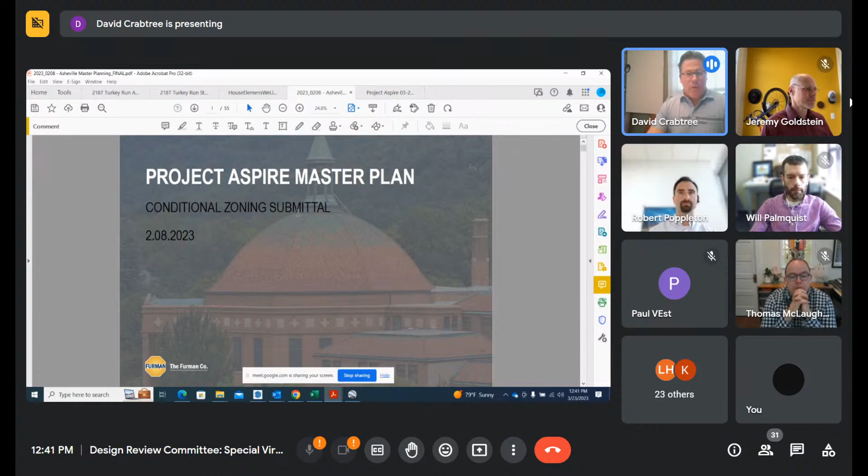With that, can y'all see my screen? Okay, cool. I'll go through this pretty quickly, going back on one of our grand vision sessions in 2021 that went through many activities. We wanted to highlight the sort of listening sessions we had, a pretty large group of folks going through that, building models, doing exercises like build your future and day in the life. That tells the story of who might come to this site from all walks of life, different backgrounds, the affluent all the way down to the unprivileged and the homeless.

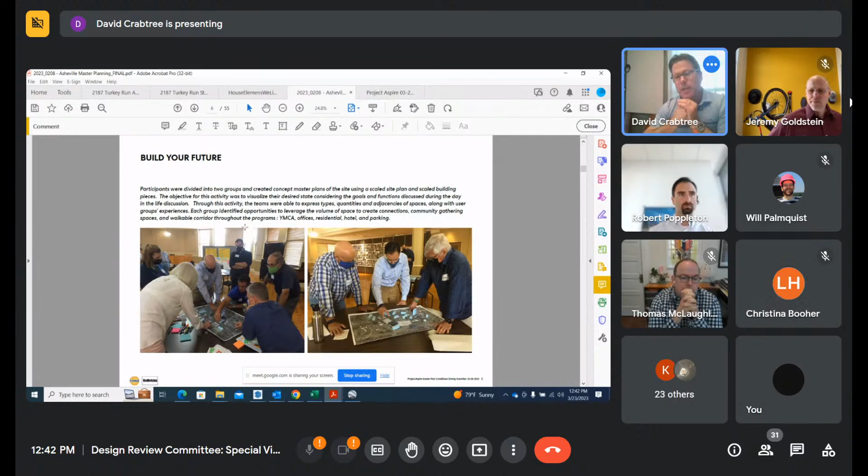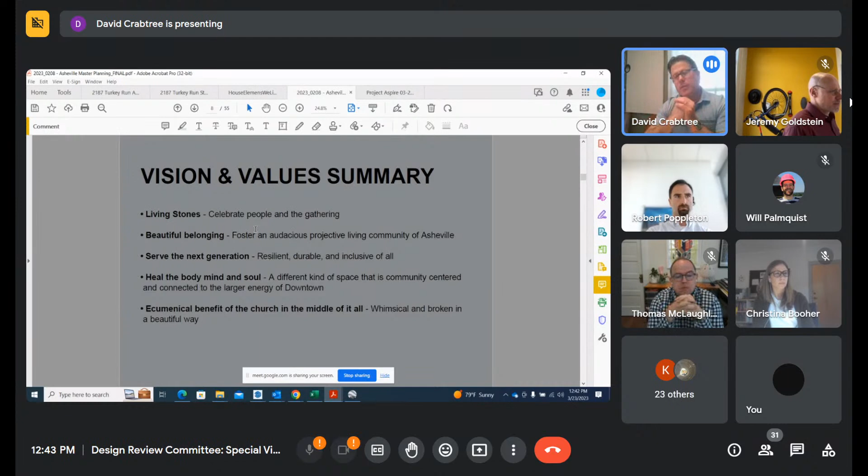And how do people encounter the site and feel welcome? Out of that came real-time modeling with workshop groups, real-time charrettes, thinking about what this project may entail. Really powerful things came out of these vision sessions: the idea of celebrating people in the gathering, what we call living stones, a sense of beautiful belonging, creating this around what is right for the community of Asheville, serving future generations and broader resiliency, creating a place of healing, thinking about sustainability, but also adding space for small startup businesses and the broader world of both the Y and the church, an ecumenical benefit.

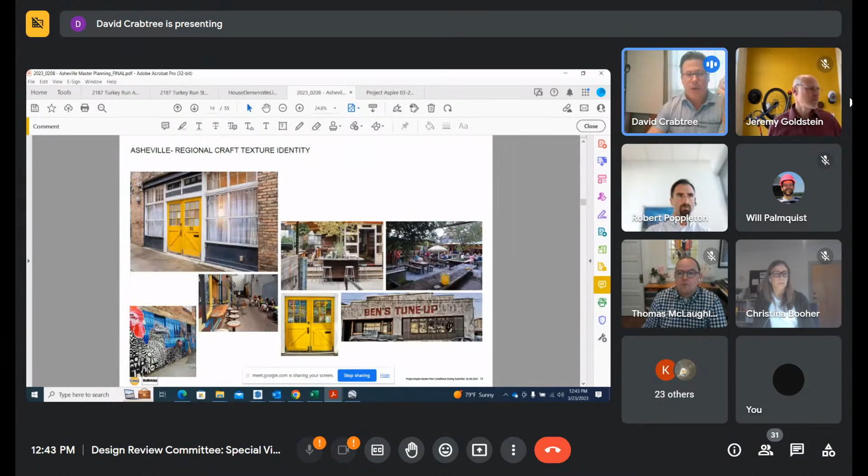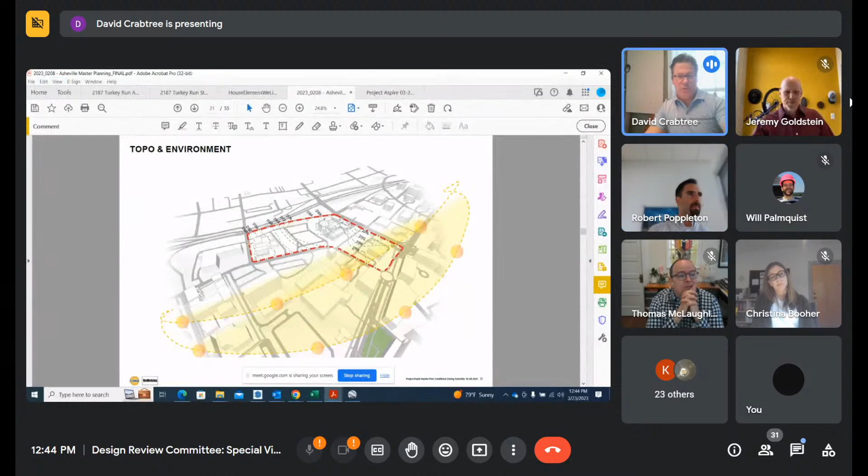Dave, can you put that on full screen? Yeah, control, just to assist. I can. Good. Two more down, full screen. There we go, there we go. For some reason it's not doing it. All right, sorry, maybe we just continue. Yeah, that's what I was doing. Control L, something is not... Yeah.

I can also zoom in where needed. Again, the site and gateways and approaches, considering a lot of view angles towards one of the defining features of the church, the dome. That was very considered throughout all ways of approach - the idea of what we call the mountain and the valley, scaling larger buildings to the perimeter outside, and then the valley, framing the church in the spiritual space in the middle.

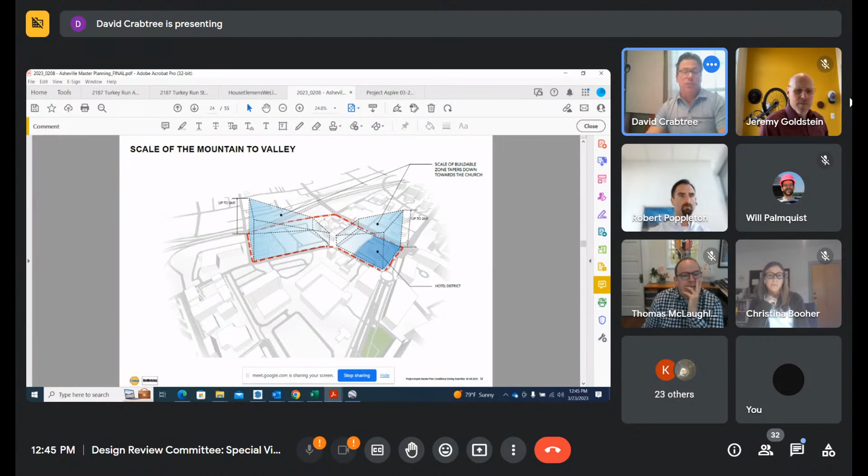The site is zoned for 265 feet for a good bit of the site. In fact, 265 feet comes all the way much further right about into here, and likewise right about into here for this portion of the site. This darker blue zone here is designated a hotel district, which we're not using that much for the hotel, but that is part of the zoning. These are the heights as currently zoned: 265 feet, 265 feet, and then you have the intermediate zone.

We're not proposing to use that, and we're really looking at the totality of the site and how we can scale down to the church. So diagrammatically, we're in our higher zones here in blue, the more intermediate zone here, and then we've created what we call the church or dome height zone here. And of course we're not building anything substantial - there's a lot of buffering around the church, as that was very important to them.

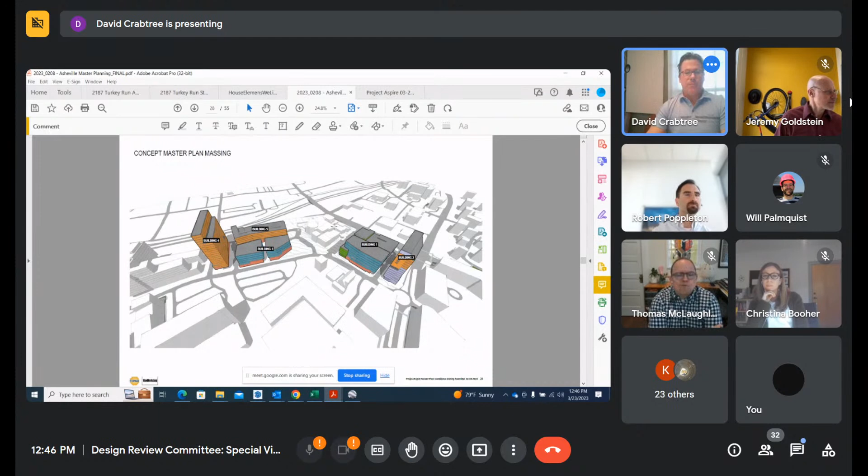Just the broader phasing: the church here, existing Y was over here, larger scale development to the perimeter, and then scaling down. Knowing the scale of modern development and the size of parking garages, a goal of granularity was very important. So bringing in vias and alleyways that would be more retail activated, pedestrian scale, is the intent of breaking down some of these blocks.

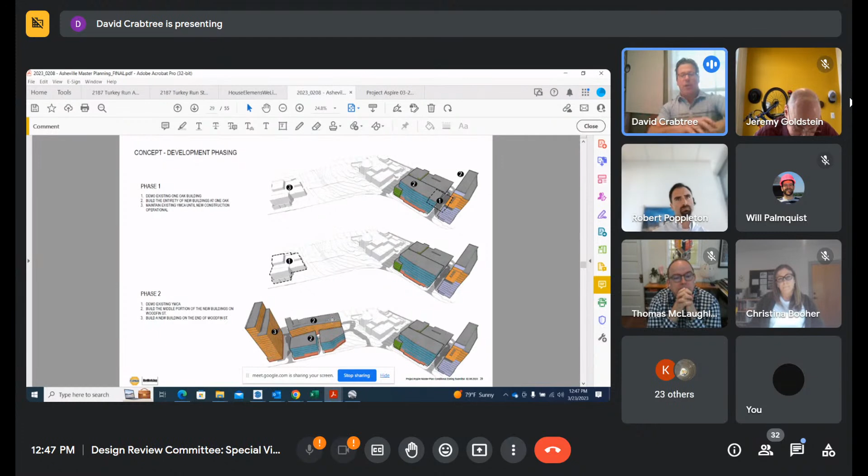The phasing, for example, would be more phase one hotel and YMCA mixed use for phase one. As phase two comes on board, whether that's taken down as one phase or still has some, I'll call it 2A, 2B, incremental through these multiple buildings. Most of our parking, or all of our parking other than street side, is identified more in structured parking that's then screened and wrapped with other program along with street side parking.

That broader master plan looks like this from the aerial view. Again, church, the phase one, phase two zone, and this may be broken down into multiple sub-phases of phase two. Where you start to see the interior vias that would be more retail focused, very intentfully framing the church dome along different areas, even making very specific urban form to frame the dome from a distance, shaping the buildings along these edges to open up that view vista back towards the dome.

In our master plan, because we're really looking for height, area, and bulk, what we've tried to do is accompany it with like kind development. So around the perimeter, the imagery is a little more generic in terms of massing, and more specific streetscape and other activation is shown along with the massing imagery.

I'll add a quick comment. As mentioned at the onset, we'll have some live models to share that reflect some changes. One of those changes is around the hotel. Currently it showed a mixed use. It's going to be reflected as a singular hotel use, and will not have what is currently shown in orange representing residential as part of that building.

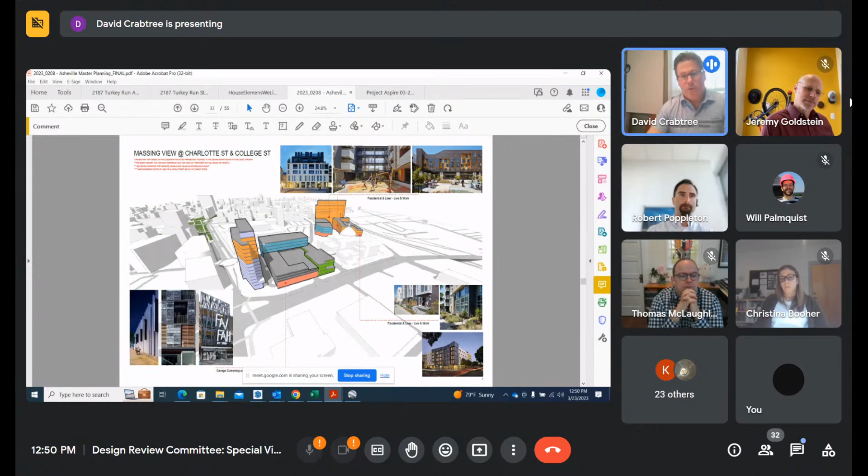Correct me if I'm wrong, Robert, we don't expect to be losing residential units overall, because it's one of the key markets making this a sustainable development. So it's not as if residential is going away versus shifting to other portions of the site. I agree—maybe even increasing. We do really recognize the affordability components as well.

Back to some of the views coming from along Oak Woodfin, seeing the dome off in the distance, seeing the buildings scaling down. The massings are intended to reflect what may be. We have been very transparent. We're meeting the pedestrian scales and breaking down of the streetscape and so on. Final design may have some variations of these, but would be around these sort of intents.

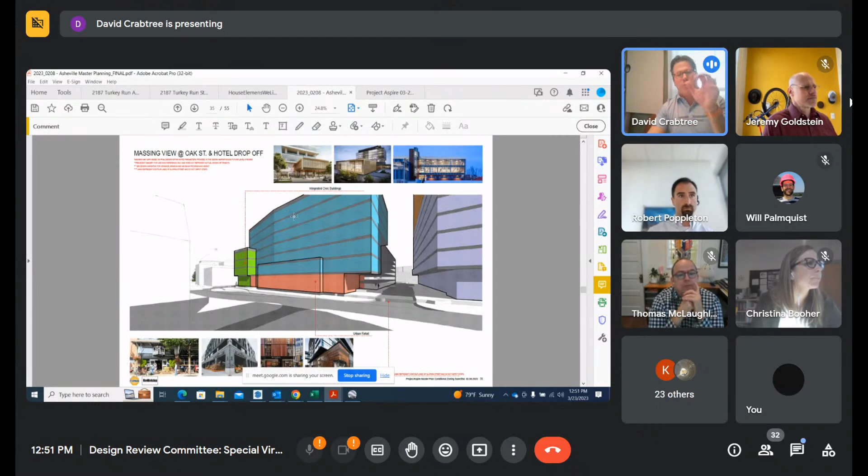Again, looking at phase one, where the hotel is to the right, church dome to the left, back away, standing at the front of one of the current church drop-off areas along Oak Woodfin, and then looking back when you start to imagine what we've called, and will rename, Fellowship Way.

That is really intended to be more of a festival street—zero curb line, streetscaping, decorative lighting, things like that. It's easy sometimes for us as a design team to imagine all the things it may be. You guys are also creative folks, and that's where some of our supplemental imagery is hoping to supplement the vision.

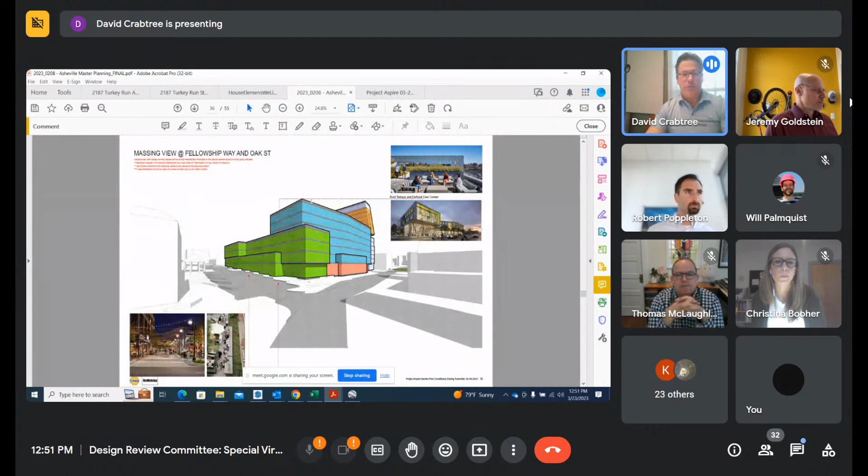Activating corners, defining how we design the corners—all of those are critical pieces that are coming to light. This is the street section that's between the church. It was very critical that we maintained about 90 to 100 feet, plus or minus, between us and the church, and that was for their comfort.

They do like the nature of being urban, but also realize they have elderly folks that need proximity of parking next door, at the drop-off zones and things like that. However, in this imagery we've stripped away a lot of the streetscape just so you could see the street section. You would imagine this—and we'll show it later in our civil plans—where you start to layer in more of the benches, street trees, street lighting, and so forth.

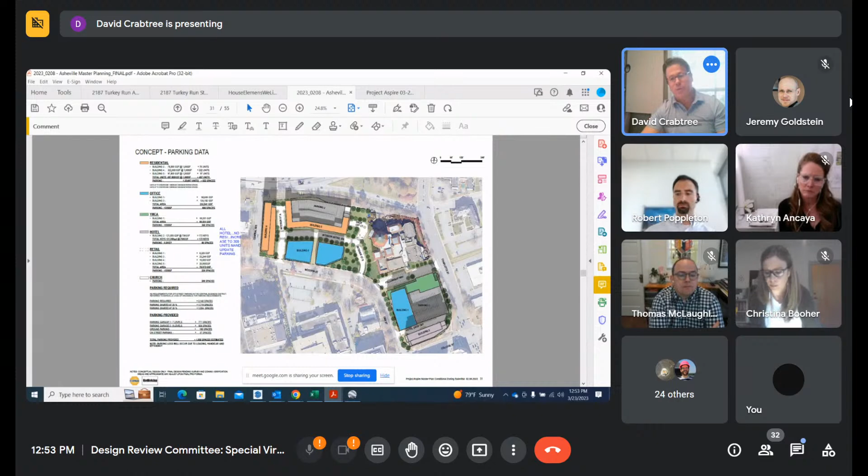This is the internal via. Master plan wise, let me relocate you just to understand. This view is sitting here, looking up this sloping street. We have about 40 feet of grade between over here to the left to over here to the right, from central up to here. So when we go back to this sloping street in context, you understand kind of where you are.

We imagine this. While it looks narrow, it's not as narrow as Wall Street. This is a 70 foot or so street section. Again, imagining retail coming in and more walkability, sidewalk dining, things like that happening, also indicative of the imagery that we're showing on the right-hand side.

I'll make some attempts to zoom in, apologies for it not being full screen, but this might be a street that's better for pavers and such. A slow street, we do imagine cars being integrated. We've discussed whether it may have an option of a non-car zone on a full-time basis, but certainly would be shut down at certain points to be only for pedestrians. At this point, it is an integrated slow street with both vehicles and people on a regular basis. We feel that could be compatible when you add in a lot of streetscaping elements, like what's seen in the imagery along the right.

You find that, again, even on Wall Street, right? It's a very slow street. Cars still happen, but people still, I would say, enjoy priority there.

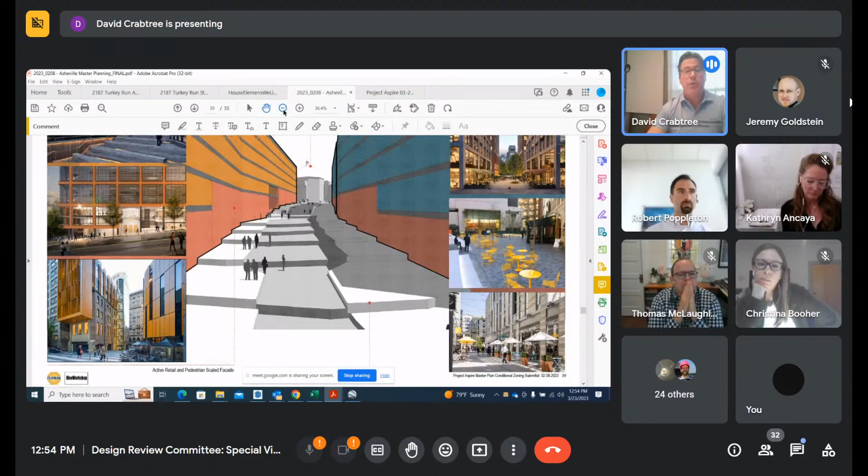At the footsteps of the church and the drop off that we would have there, residential kind of at the door, at the threshold of the church, is sort of living lifestyle. Some examples of what that may feel like.

We imagine this to be more of an open park area with public space, accessible, stepped lawns, outdoor seating, could be movies on the lawn to yoga in the park, and a wide variety of programming that could happen in some of these spaces.

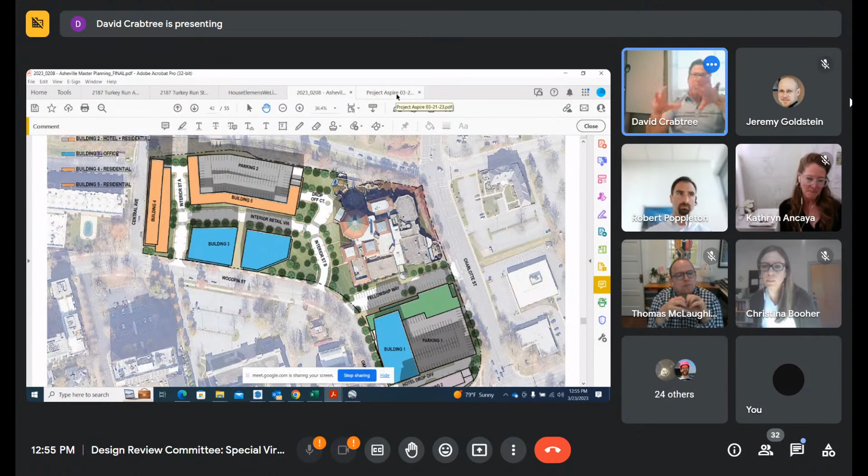So that kind of brings us really where we are today. Some of the comments we heard were about the landscaping shown in our illustrative master plan, which was very illustrative. So what we've done was take a look at pedestrian access, defining sidewalk, street sections, planting, what we would be able to keep, what might need to be replaced. Those are the things I would like to pivot to and share with you.

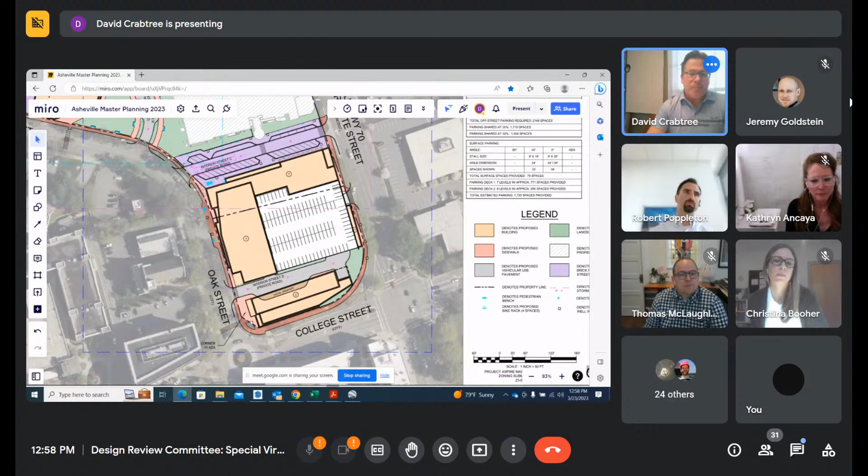As we move around, again, defining the sidewalks. Blue is where we'd also have more public benches, flexible lawn space, sidewalk connections coming up along the mixed use office buildings that are anticipated for retail, indoor and outdoor retail. The church drop off and roundabout, ingress egress to the parking deck, and also ingress egress to the parking deck.

And also recall there's that 30 to 40 feet, depending on where we take it, there's internal ramping that if you came in here, you're able to ramp down and come out here, and likewise ramp up.

We don't have and do not want any ingress or egress to the parking deck here, one because of the complexity, and two, to maintain the pedestrian feel. As I noted before, we are very intensely trying to isolate bulk parking to these two zones, to really make the streets more of an urban feel.

Again, starting to note tree wells, blue light bollards, benches and so forth along these internal vias. Similar along in here, we imagine this to be much more of a textured paving sort of, I don't want to use cobblestone, may not be what we find there, but a festival street section would also be anticipated in here.

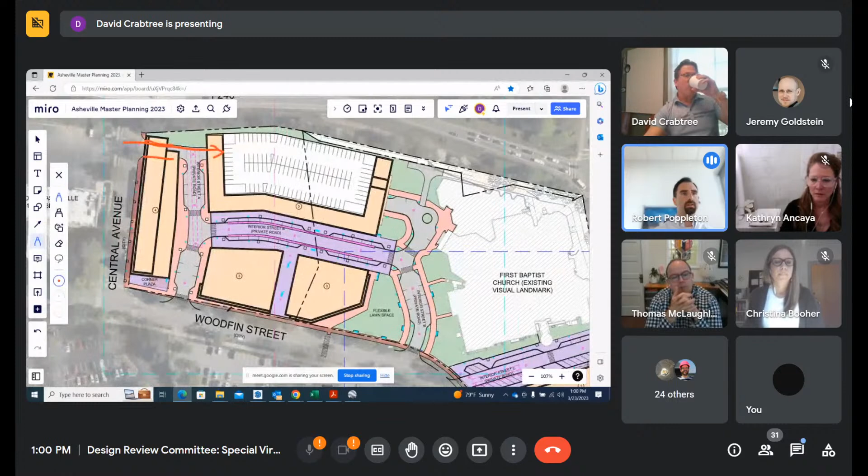These are all beyond 10 feet, and in most cases more than that. I don't have the CAD model up, and our civil team could give better feedback. They're also on the line. Am I correct that we're closer to 12 to 14 feet on some of those, or am I?

Yeah, Dave, Mathieu Maggio here, Britt Peters. Those sidewalks are all 10 feet with tree wells placed alongside as necessary. We have the existing trees here. Yes, I was talking about Central. So we have that guy here.

What are these sides? Just for proximity, what's our dimension there? Those are 10-foot sidewalks. And then these here are also 10 foot, but those have tree wells placed since we don't have room for landscaping up to the existing curb. So these are your tree wells, the squares? That's correct.

And just to re-emphasize, I think Christina, that was your question about access from Plan North on Central. We don't show those sidewalks currently, but we absolutely intend to provide them. So that may be a refinement we'll make between now and our resubmission.

And is the retail on that building floor facing the interior, or facing Central Avenue? Both. The anticipation would be both. Again, we don't have final designs for the building, so we could have anywhere there would be some loading and service needs for the residential building there.

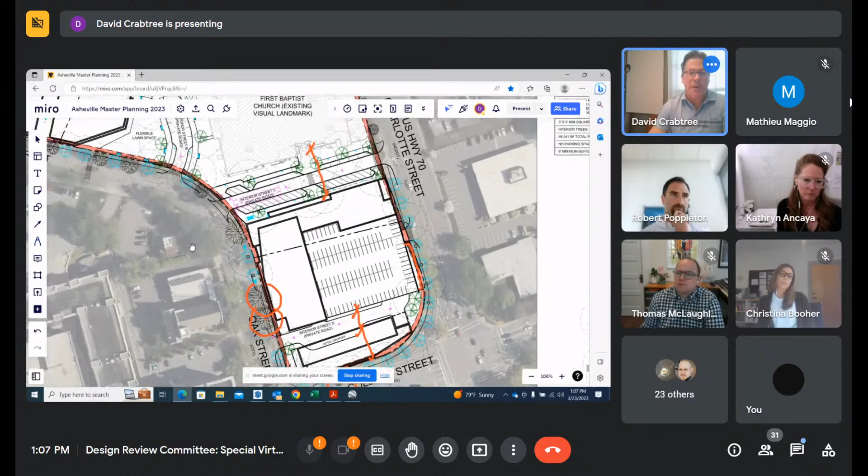But we have identified in the latest exhibit where new street trees would be coming in like these to define the fellowship way there, to existing ones that are being maintained, to then the cyan ones that are also being shown as new. Cyan being new, meeting your street standards, and then the green being more on our site and for internal drives.

But with that, I do want to turn this over to civil, and did I miss anything? You can reshare screen or share anything you wanted to highlight. I was just trying to get us through all of it. I think we've got through all of our material, and we're a half hour in or a little more, so we could have time for more discussion.

And civil, do you have anything? Yeah, no, Dave, I think you did a great job of explaining our plans. The only thing is I don't know if you want to spend a little more time on sheets 2 through 4, they're a little bit more blown up, have a little more detail about the area, some dimensions, the driveway spacing.

Things like that. Let me go back, and again, I can try to share and then you narrate and direct me where you'd like to go, or if you would like to share, that's also fine. What I'm doing, this is the second sheet, right? Yeah. So you go for it. You tell me where you'd like.

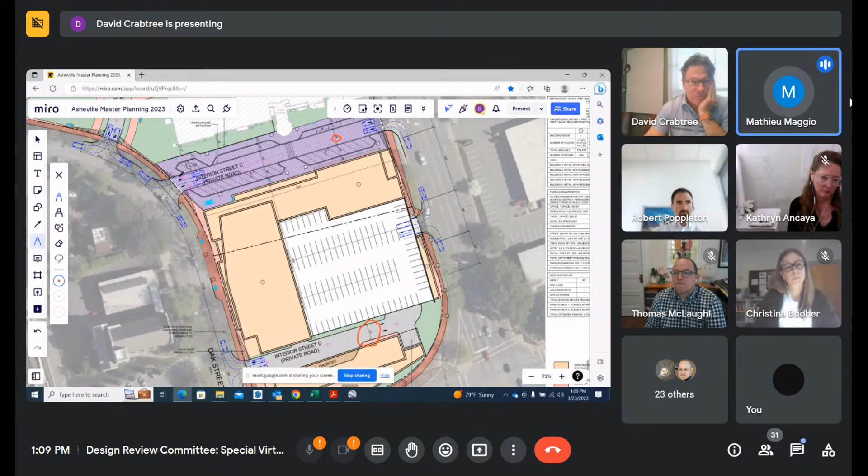The proposed sidewalk along that area is intended to basically be set back from the existing sidewalk. So that's how we're going to go ahead and maintain those trees. Yeah, so what he's describing is we're kind of holding that planting zone that you previously had.

Yeah, and then you can see we've done a little artistic feel there with a paver area to the north, just to give a general idea of what this area might look like. And then there's some better dimensions to help define the site a little bit better in space. You can go on to the next page probably.

One of the other drivers around this festival street is the ongoing safety and consideration for the childcare traffic that occurs there daily, in addition to the needs of church circulation. So that's why you're seeing some of these drop-off zones, as well as smarter designs to be traffic calming throughout that space. And keeping that drop-off area more to the left, away from your drive there on Charlotte, to maintain better stacking space and help out as much as possible at that driveway.

Probably go on to the next one. The other comment was pull-in parking as well. We did do angled parking, adjusted the plan from 90-degree to angled parking in this direction. All in an effort to make this feel like less of a through street and more like a pedestrian friendly,

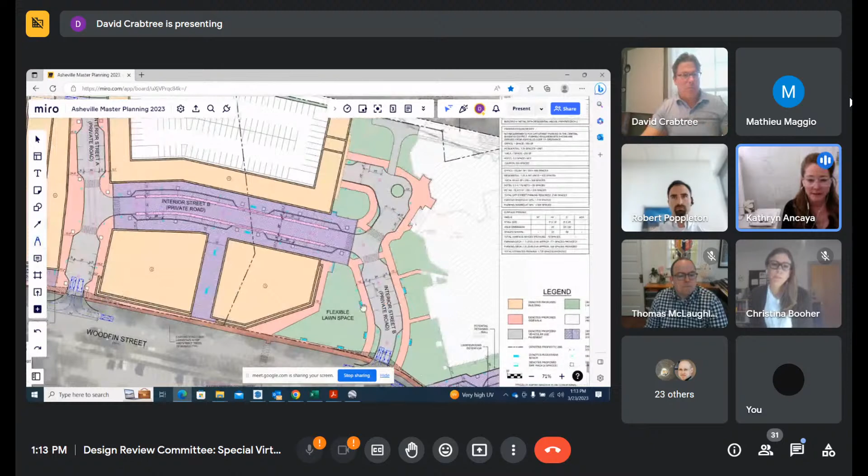I got it. I just wanted to say something about that, because I think there's a real opportunity here to think about these green areas, and even the way we're proposing the street trees, is how can the green areas or landscaping be more than just the icing on the cake, but actually be used as infrastructure. Could we be treating some of the stormwater before we take it underground? There's a lot of great opportunities and examples in other cities where they've incorporated green stormwater infrastructure into pedestrian areas, that it actually becomes a beautiful amenity.

Thinking about that at grade, and then also green roofs, managing a lot of that stormwater before it even hits your stormwater system. So I think that a project at this scale has a chance to really change the way that we think about urban design and infill development.

Also just want to point out that this area is located in part of the city that has a really high heat vulnerability. So thinking about urban heat island and how we can be using green infrastructure, green stormwater infrastructure, as a way to not only improve stormwater management, but the larger community benefit.

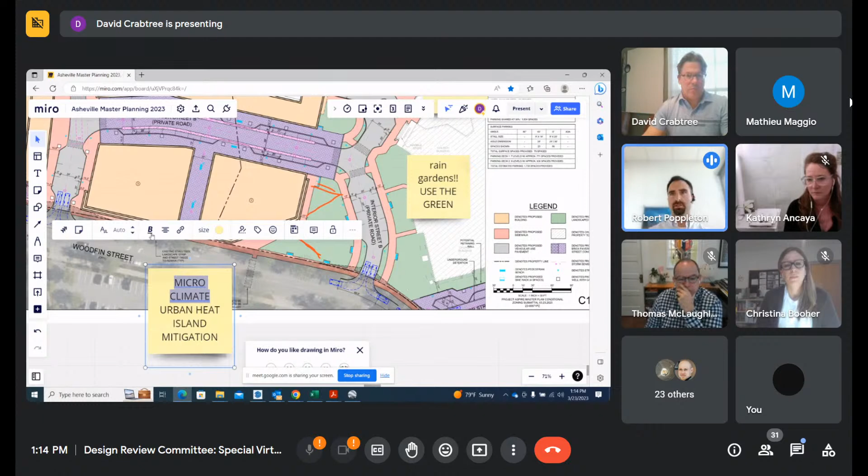I will say, on the development side, not as familiar with the last comment, but we'll be exploring that with our team. We are familiar with a lot of the practices in stormwater management through green areas and applying them in other projects. So it's certainly something we'll emphasize as this design matures. You can be looking for that in future iterations.

I just wanted to add one more thing, is that at grade, that doesn't have to look like a detention pond or more suburban type treatment. You won't even notice that it's managing stormwater, and you can use really amazing and beautiful materials. So just thinking about the way that you're thinking through the design of these other spaces, your buildings, and the pedestrian environment, to take that same level of design thinking to these green areas.

Yeah, I love that idea. We're doing that on a handful of projects right now, so I'm with you 100%. You want to join the design team?

Yeah, but like gabion walls and things like that you could start to create transition zones and cool walks that cross over different plant typologies to help filter. I was taking some notes along the way. So yeah.

Since you're excited about that, I'm going to add one more thing. Asheville has a real problem with stormwater. We have a lot of challenges. Anything we can do to reduce the amount of water hitting our existing system, which is deteriorating over time and needs to be maintained, just alleviating that pressure is something our community will benefit from in terms of money and investment. Because it's new construction, there's a lot you can do up front to save money down the road.

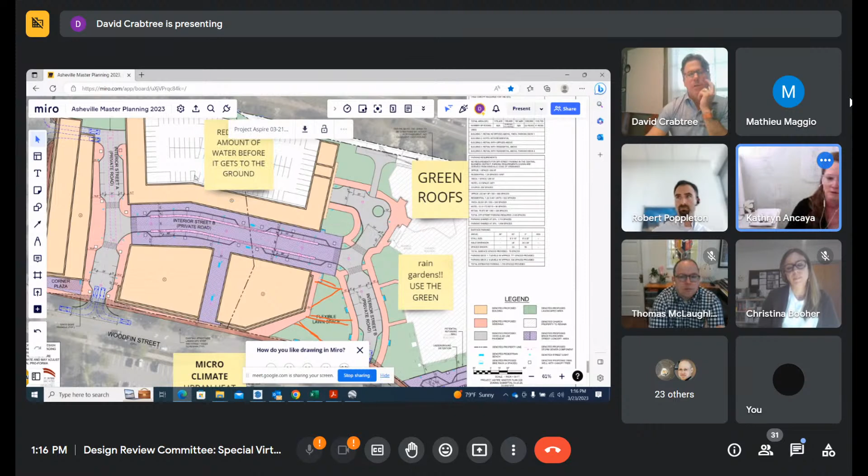Yeah, that's a good point. And then also slowing it down — more pervious surfaces, or when you were thinking about pavers, or like you mentioned, green roofs help in that way too. They do some absorption, so it's not all just collecting on a roof and immediately hitting the storm system. It slows the volume down. So I think all of that is kind of in line with where you're talking about.

Actually, going back to the question earlier, we are showing where these drives come through in some of these exhibits.

Dave, it looks like we got one question. Michael, did you want to?

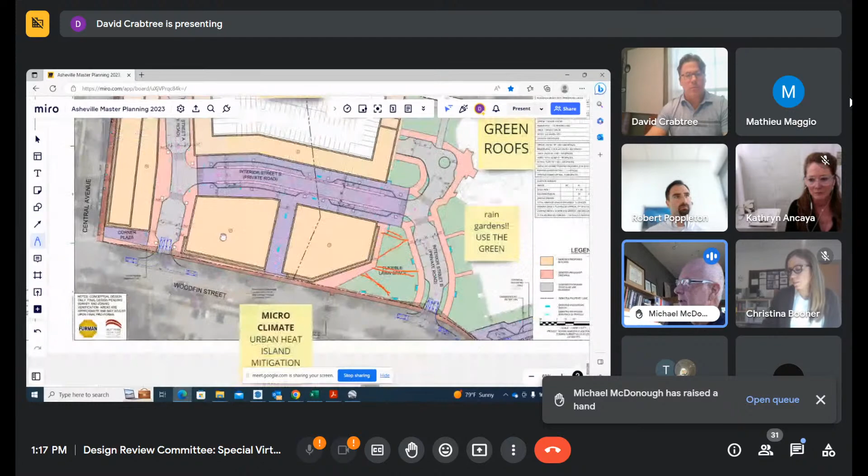Hey, yeah, thanks. I'm really impressed with the project. I think possibly the weakest corner is the corner of Charlotte and College Street. Robert mentioned there were some evolutions there in wrapping some street pedestrian elements in front of the structured parking. Do you have any images other than the 3D masses of what that is evolving towards?

Yeah, that's a good point. So let me give you — this is the broader model, if you will. And let me, at the risk of just — I did a kind of basic height exhibit so you can get a sense of where we're at. Let's see here, conceptual massing view.

Again, hopefully we don't break the internet here. I'll click on a view and everything crashes, or maybe we'll stay functional here. I'm not going to move for a second — okay, cool. I'm going to let the computer do what it needs to do here.

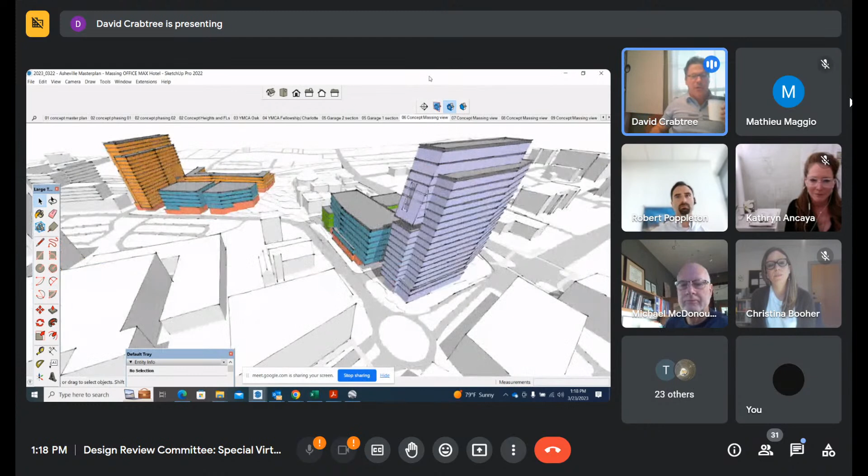Well, and maybe while you're looking for that, I'll add another comment. I think, and this is maybe for staff, the intersection of College and Charlotte Street is horrible. It's a suburban intersection, and our wonderful downtown fabric disintegrates quickly when you get close to that intersection. It's too wide, too broad, too many lanes, and that southbound turn lane that bites into your site there is kind of a suburban gesture.

Is there an opportunity for the city to explore tightening up that intersection? I was involved in the review of the hotel across the street to the south, and I thought they did a pretty good job of pushing up to the corner there, the opposite corner of Charlotte and College. Right here — yeah, they did a pretty good job of pinching that intersection as well as they could. And I think you're stuck reacting with an urban form to a suburban intersection. So I would encourage staff, if you're involved, to see what we can do about remaking that intersection.

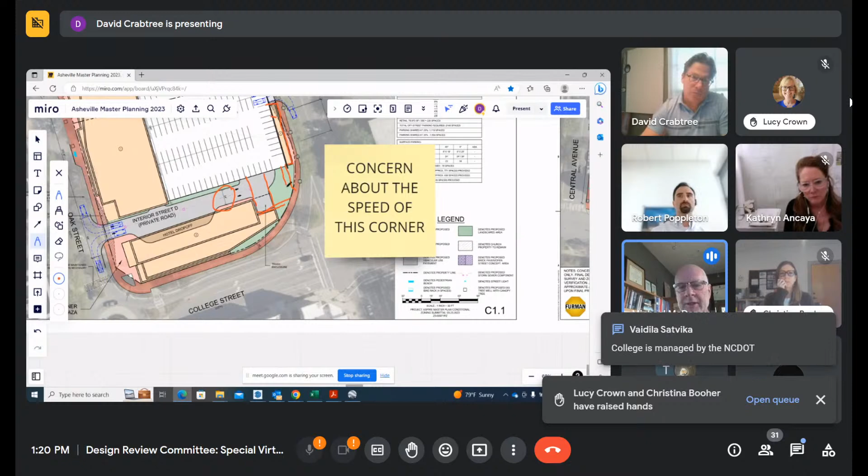I'm counting 6 lanes coming south from the interstate, becoming 7 lanes with that right turn, which I guess if we can urbanize that right travel lane — I don't know. It seems like there's a missed opportunity to reconfigure that street while we're at it.

Yeah, you're bringing up a concern of ours, because look, we're urbanists and we believe in the human experience. We're all in on adding the liner space and all that, but our overall concern is the speed of the traffic there. Whatever we build, we'll do everything we can, but without some other traffic calming and things beyond our control, it remains a challenge.

And I know this is multiple layers of government agencies on this, particularly here. Your point is well noted. We've had a lot of those conversations on this street section. I see a comment from Vaidila.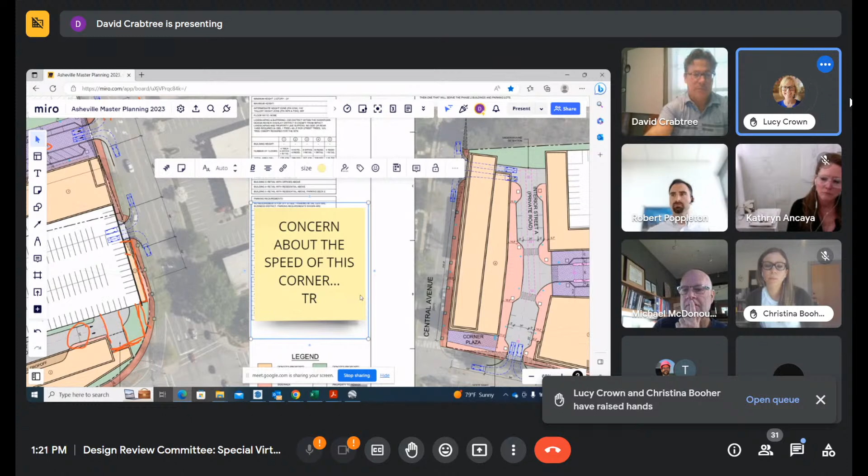I just wanted to highlight, I'm Lucy Crown, the transportation planning manager, and we're also very concerned about that corner. It is a state owned road, which is the problem, but we just heard about this project last week and would like the opportunity to take a look at this. We're very concerned about bike facilities, which are not existent in this area right now, and the amount of cars heading from Charlotte Street.

Down College and onto Oak Street and Woodfin are all areas that we need to fortify our bike infrastructure. I don't certainly know what the answer is because we're feeling very rushed trying to catch up at this point, but would really like to sit down and talk about that.

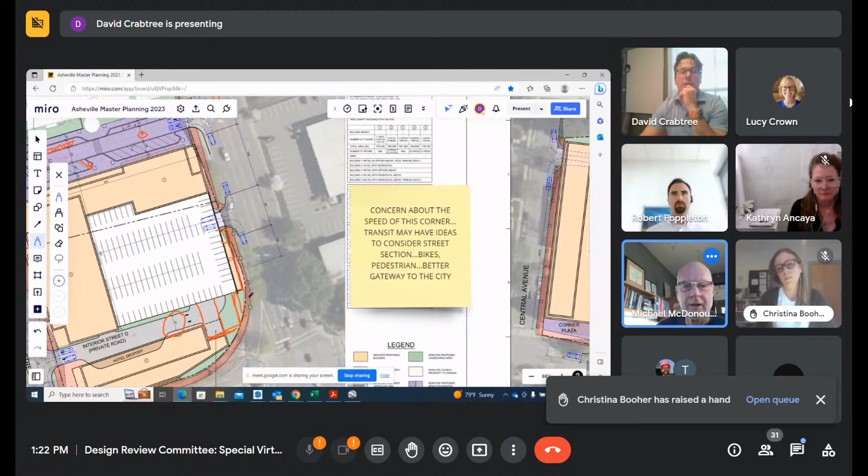Gosh, you would think there's plenty of paving there to add bike lanes. Have y'all considered a right-hand turn in only into the gap between the hotel and the structured parking there, on that right-hand turn in there from Charlotte Street? Yeah, it's not allowed based on state standards. So things we are looking at right in here and right out only. But this portion here, because of the proximity and the curve, it was not allowed.

We've had some interface already today with NCDOT where we explored some of those conversations, Mike, and we're very much in favor of improving safety along this area, and if we can support improved bike infrastructure, cycling infrastructure, that would be a big win for the community, and also for the project. Regarding connectivity, I will mention something that's not part of our master plan area, but that will be part of

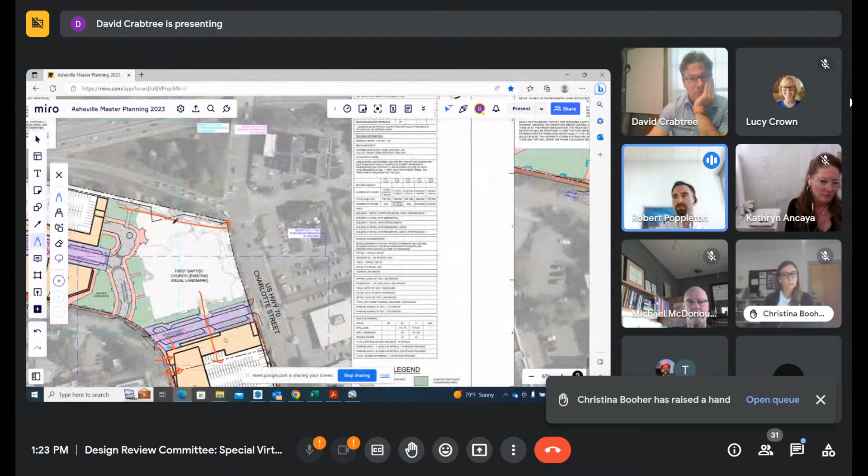our exploration with the church as partner in this project. On Plan North, establishing just on the north side of the church, there's some existing throughway we think that could be activated for pedestrian traffic at the very least. This doesn't show up in this map or in this site plan, but there are some opportunities that at least in the interim we can improve connectivity for pedestrian traffic into downtown through the project. So those things aren't given yet in this project, but certainly, we're all for improving infrastructure throughout the area, especially along Charlotte Street.

And we do imagine, for example, while we haven't shown a building being here, that, depending on the hotel flag and connectivity to the garage, there would be some level of design that would happen here, whether it's a building or whether it's sort of relief, sort of public plaza, parkish kind of vibe. But it would still be a critical design element here.

There is a pretty good grade change here. So just FYI, if my memory's right, we'll call this 14 foot, we'll call this 0 foot, we'll call this 8 foot, somewhere thereabouts, right? This here is about, I think, I'll call it 3. So just to get you a sense of the broader kind of slopes doing this. When we're coming in here, any of this loading is actually happening subgrade because we're holding the grade down. So if you're on the sidewalk here, you would be at an upper zone, if you will, just to create some context.

We have a couple questions. Christina, I think yours might have come in first. Yeah, I'm really excited about this project, and thank you for the presentation.

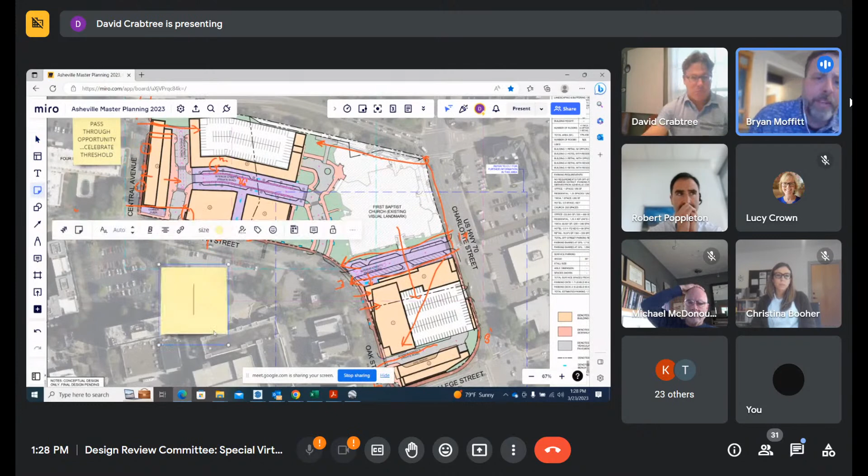Activating that pedestrian area. I know you've got to put the parking somewhere, but right now with that parking for the Y building and up for the hotel, that's kind of turning that corner. We've already talked about that corner. I feel like you're going to need something on that corner of College and Charlotte, maybe not a building, but it needs to be a designed element.

This is a gateway to the city for a lot of people. You come through the tunnel and down to this intersection, and this is always where I feel like I'm really entering downtown. I know I've seen some of the massing studies, and you're doing some neat stuff pulling that building and bringing it to a point. But at the pedestrian level, I really want to feel that entrance, not just look at the corner of a parking deck. I want it to pop a little bit more than that.

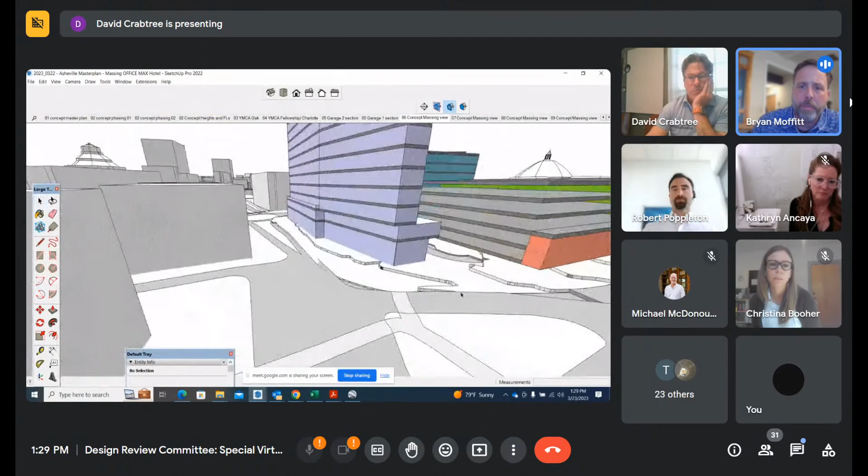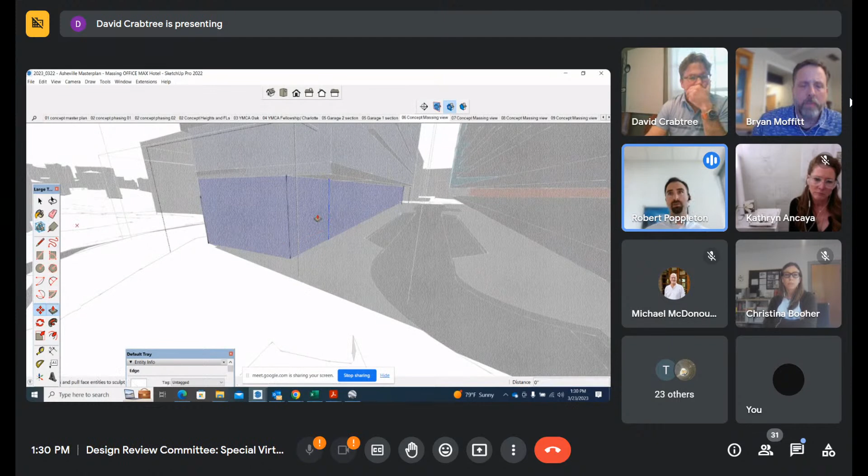Bryan, please continue after this, but I wanted to insert that the conceptual hotel program we believe will land on this site is going to heavily emphasize food and beverage and experience that spills out onto that corner. We recognize on the development team that downtown experience doesn't extend here currently, or it's limited to say the least, but it's so close to Pack Square and to a lot of the best offerings downtown has to offer. So we're looking to pull that into the site through the hotel. We agree, and getting that right is going to be very important for us.

David is designing, as we speak, this showpiece with the hotel, which I think will end up having a connectivity piece to round that corner to the rest of the project. We're hearing you loud and clear and are aligned on that. That little corner, that little pedestrian activation piece, is going to have to wrap somehow and extend up. That needs to be a showpiece.

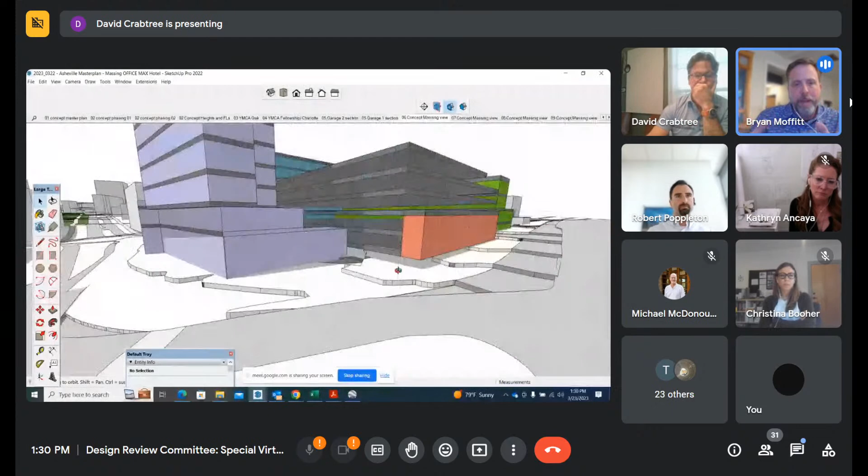The way it's been massed right now feels a lot like you've built a wall around the site, a little bit monastery-like, keeping people out of it. So when you're designing these, and even as you're cutting things through, try to bring people, the city, into the site. I think that's one of the things, at least from listening to Christina for a year and a half now, that she's wanting you to do, not just bring people beside the buildings, but in through the buildings, into the site, through the site, across the site.

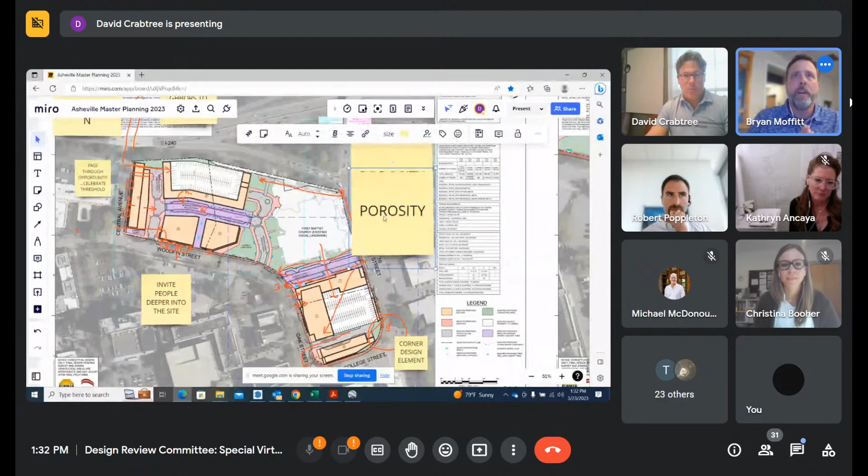Kudos on your diagrams. One thing I'll say is you've talked a lot about the church being wonderfully bizarre — it's Ellington's, so he's got these cascading forms, lots going on. But nothing on the site is really reacting to the church in terms of design. You've got a little drop-off area in front of the portico and an off-center thing. I know this is early, I just don't think the buildings are starting to react to or capture the church yet.

I think you should lean into the bizarreness of the thing, take it forward, make it modern, make it current. There's a lot going on that you could be doing more with in your site plan around that. Right now it feels like we don't want to touch it, so we've pulled away a little and brought the building scale down. But that's all I've really heard, and on the side it just looks like a bit of a checkbox — a landscape thing, which I know is all we're at right now.

I'm encouraging you to really think about that green space and design it not just as a space between the buildings, but as an actual element in the design itself. I should probably let my design team react to that, but here I am — I'm going to jump in.

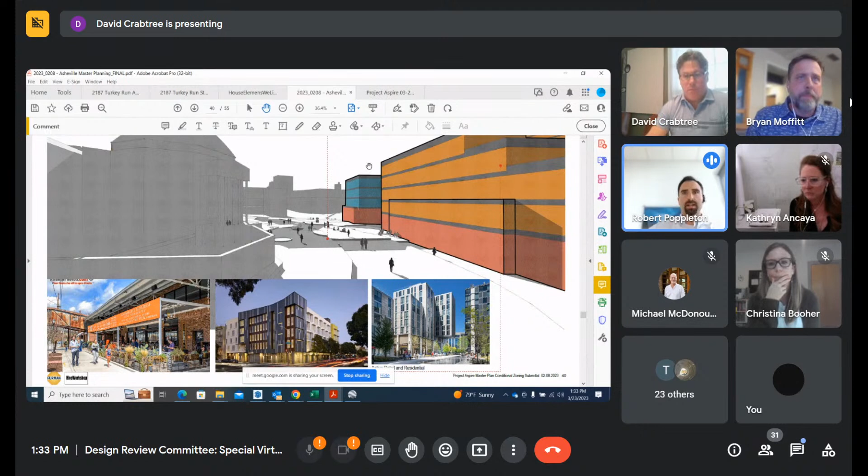Yes, even though we're not at design yet, we've spent a lot of time thinking about these concepts. One thing we haven't emphasized much yet, but is a big part of phase one — and phase one is a tight site, we're trying to do a lot with it — is that the YMCA in green, at least for the Charlotte experience in our current development concepts, is going to be a highly activated and attractive building that really pulls in the passerby. There's going to be a lot of glass, a lot of activation through the functions of the Y, so I think we'll have an opportunity to pull people in that way. Again, the tightness of phase one's buildings — the hotel, building one, and the YMCA — will be limiting.

We'll still address it through design when we get there, but at the master plan scale now, we also see phase two has a huge opportunity to accomplish everything you're describing, and Christina too, in a bigger way — we have a bigger canvas there. We already have areas reserved for buffer zones that can be inviting sources for the project, so we'll get into a lot of that in the next phases of design.

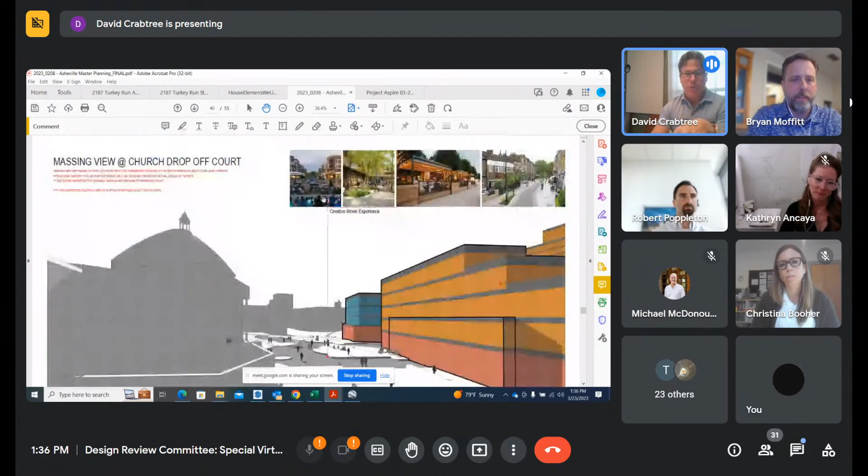It is very intended that this becomes the piazza and the doorstep of the church, celebrating the space between the future buildings here and the church. The best we can do at this point is share some example imagery of what we anticipate, like articulated residential across the way. It's not a street, right? It's for people that happen to have cars. It's very much in the spirit of what we're trying to break down through our precedent image at this stage.

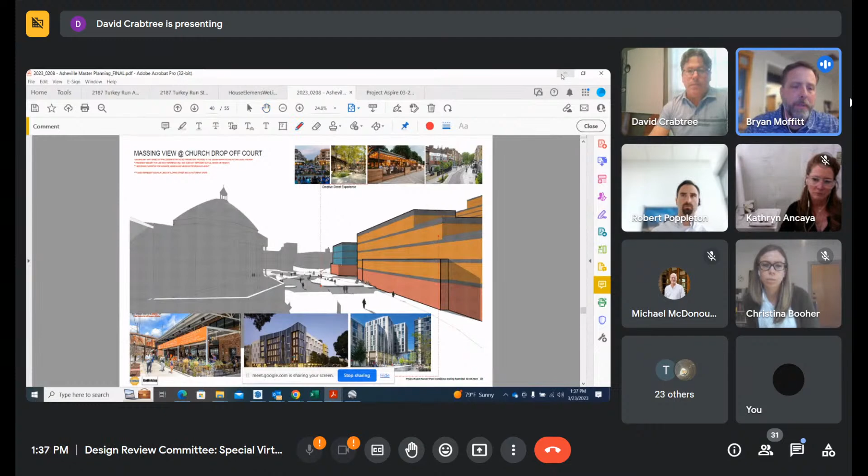I'm just reacting to, you've got a little green dot that's slightly off center from the portico, which is a significant element, the very first thing on the National Historic Register application. It's not centered, but not off center enough to make it important. That little white dot in the middle of the screen, yeah, that guy. So it's that kind of stuff that's making me go, okay, that's a placeholder, they're going to do something. In other words, it's typical design stuff, right? If you're not going to have it line up with anything, make it apparent what you're doing, what you're reacting to, make the tension mean something.

So I know you guys are still working on that. I don't want to beat that drum too much. One last comment and I'll quit. I'll put on my downtown design commission hat.

Kathryn was nice to you. You're going to have to do green roofs. That was not a suggestion. So if you're looking for a CZ and you're looking for a positive recommendation, I just wanted to go ahead and make that clear.

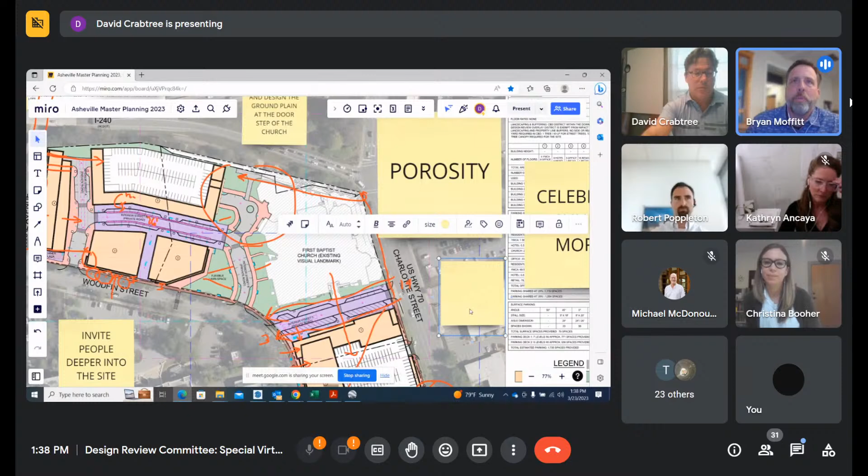Is that in your, maybe we didn't recognize it? No, when you're doing a CZ, you're asking for things, and this is a huge project, and we're actually looking at incorporating that in future codes. That's a discussion we're having right now between different parts of the staff. I'm just letting you know that's coming, so go ahead and start designing around it.

Are y'all considering, like a lot of places, this as an incentive bonus? Like if you provide it, the way you're framing it now, if I'm hearing you, it might not be a requirement, but it's like, hey, we need these and we believe in them too. Yeah, that makes sense.

Respectfully, I don't necessarily agree with Bryan. No, he does not. Hey, Jeremy. So no, I just don't think it should be arbitrary. I think there's either a rule or there isn't a rule. And if you require it from one conditional zoning, I think you have to require it for all. I agree with your goals, don't get me wrong, but I'm not convinced we have the ability to just arbitrarily say I'm not going to approve anything unless it has a green roof.

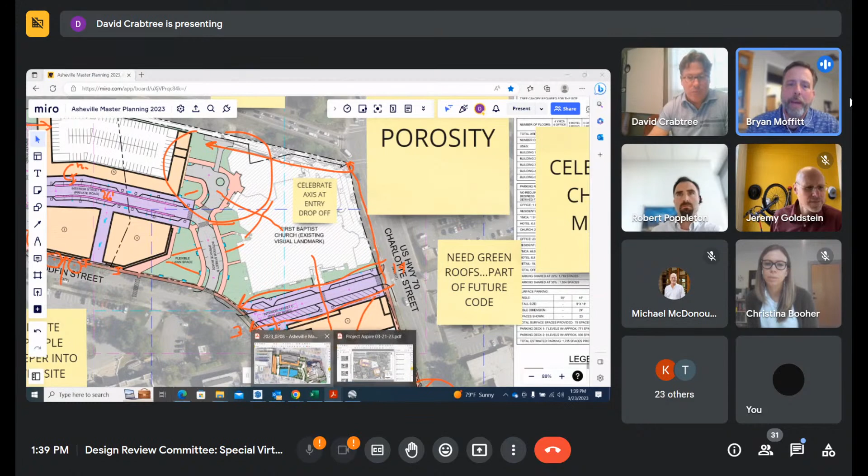No, or at least the discussions we've had is this will be part of the stormwater and the tree canopy, and there's other pieces to it. I know from past experience that a green roof's not something you can just paint on the roof after the fact, you've got to design around it from the beginning. So I'm letting you know that you need to start thinking about how you can incorporate some green roof. Obviously you can't do it everywhere, and you can't even do it in all the roof you're doing, because you need somewhere to put mechanical equipment and so forth. But go ahead and start thinking about how you can incorporate some of that. And we're not talking necessarily about habitable green roofs. I know you guys know all this. If you have any questions, ask Kate, she's the expert.

So I think it's a good segue to a subject I really want to take advantage of this brain trust gathered, and pool a lot of your feedback on market conditions. At the end of the day, this project needs to be feasible. We are trying to design something that meets community needs, meets a lot of our sustainable objectives, meets partners' goals, but also can be absorbed by the market.

That brings me to our building one. Our first phase has the elements we've reviewed, including a hotel in a massing form that I don't think is going to change too much. It's definitely not getting taller than what we're proposing. And then we have the YMCA, this very important community anchor feature. It's this in-between space.

Can you point those out on the screen, please, while he's talking? Yes, point that's to the right. He's talking about that, everybody knows.

Hotel here, the church - I'll just put a C - is to our back. This is Oak and Woodfin here. This is what we've called Fellowship Way, and recognize that street name cannot be used, but the internal sort of Fellowship Way, and then the YMCA sort of anchoring that.

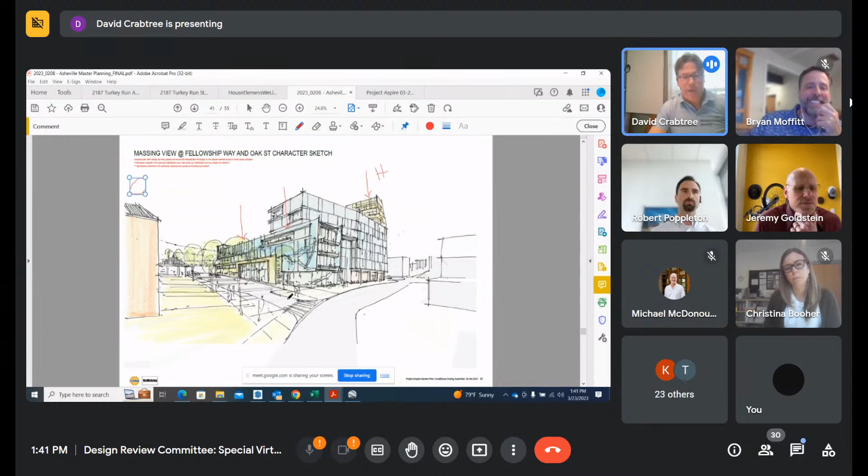Can you go back to the site plan that shows all the phases and the buildings and point it out that way, please? Yeah, so that view I was just sharing with you is sitting here, looking at that - standing kind of right along Woodfin, looking back that direction.

Just what I wanted to comment on, and we can zoom into phase one, Dave, for the sake of more clarity. It's been our intention, and still is, to deliver a significant office building as part of this mixed use phase one. That would be what's seen in blue, building one.

We are also having been through some heavy recruitment in the market - we're not seeing that, especially with market conditions the way they are. We're not seeing enough demand to justify that scale of office delivery here. We have more in phase two, so we still think it's an important part of the recipe, but may not be as strong, or at least we're preparing for assessing the market to see how we can pivot.

One of those areas is in multifamily. We're actively assessing the market for the right fit into this. It's already included - a significant amount of units are already included, and those units range in affordability throughout the master plan. We didn't talk a lot about it, but phase two includes more than 100 units of LIHTC, what we think is going to end up being a LIHTC project, as well as market rate, as well as workforce integrated to that market rate product, most likely.

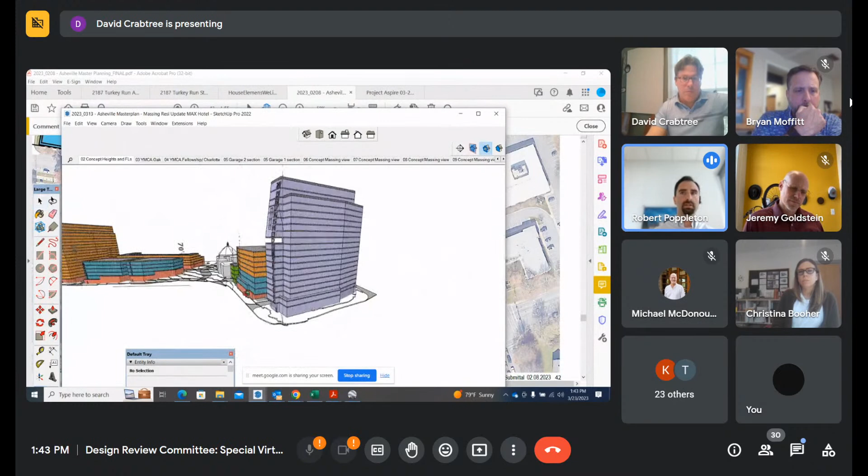So we have what could still work within the height zones that have been established in our application, and lesser so than what existing zoning allows. We're starting to show a few different concepts of what multifamily could take shape and look like. There's some positive sides and some challenges that we're dealing with from a buildability side. But the activation along Charlotte, I think, increases.

But Dave, I don't know if you want to talk a little bit about this, and then really interested to get both the committee's opinion and staff if you're here too. Yeah, the simple version is we are looking at opportunities for residential to become a little bit more wrapping around the site, if you will. You could start to imagine, again, Charlotte having the gateway and having a little bit more sort of activation both at the higher levels.

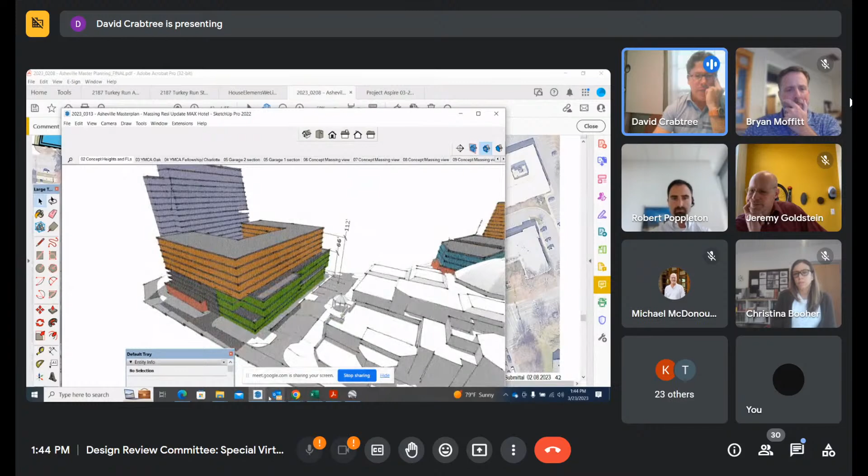This would put us in a 200 to 300 key sort of situation. We don't imagine - you could imagine that we're showing roughly maxing out what the 145 foot looks like. This is 136 to that occupied level, so it's slightly below. That would be pretty intensive for residential. Don't really see that happening, but we did want to just...

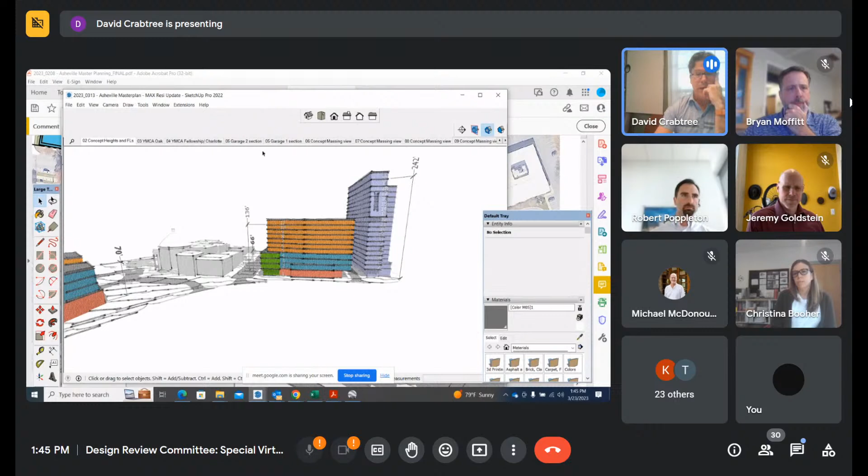Part of the design task, Dave, show us what we can put here. Right, so we're trying to stay even below what, again, what's allowed to be here is 265 foot up to this line - so your current 265 foot line floats right about in here. And that's our mission - it isn't to max out this site, that's not the goal.

It's more the totality of porosity - I've used that word earlier, hearing other people - of like, how do you move people through the buildings, creating mid-block. To be quite frank, these are very small footprints. This is 13,000 square foot. It's hard, we can't be any smaller than that and be - that's a difficult enough footprint.

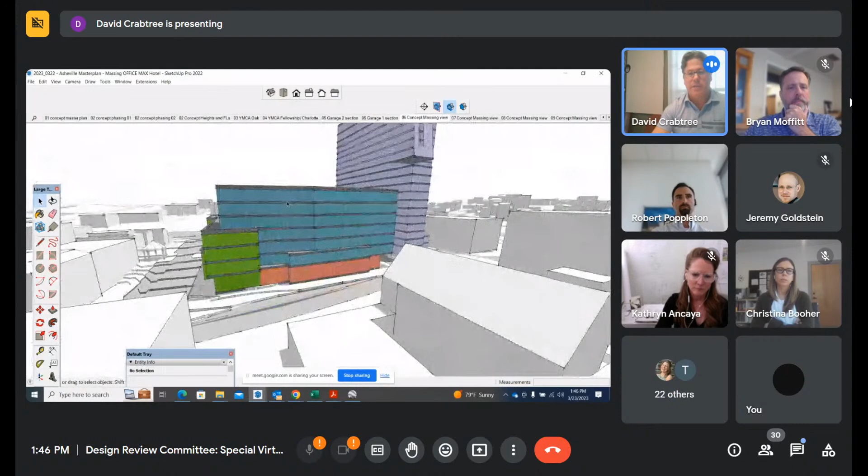So how we're trying to break some of these down, these footprints are a little larger for residential, but when you go back to being an office footprint, for example, this guy here is also fairly small. We're only at an 18,000 square foot footprint for these guys. So those are minimum typical, and I know it's Asheville, so things are more granular, small scale. Part of the reason big users have a challenge coming to Asheville is it's hard to find 100,000 square foot. You have a lot of 2,000 square foots and 10,000 square foots, maybe on the bigger side.

But I know these buildings have some weight to them, but at the same time, they are fair on the industry standard. These are small footprints.

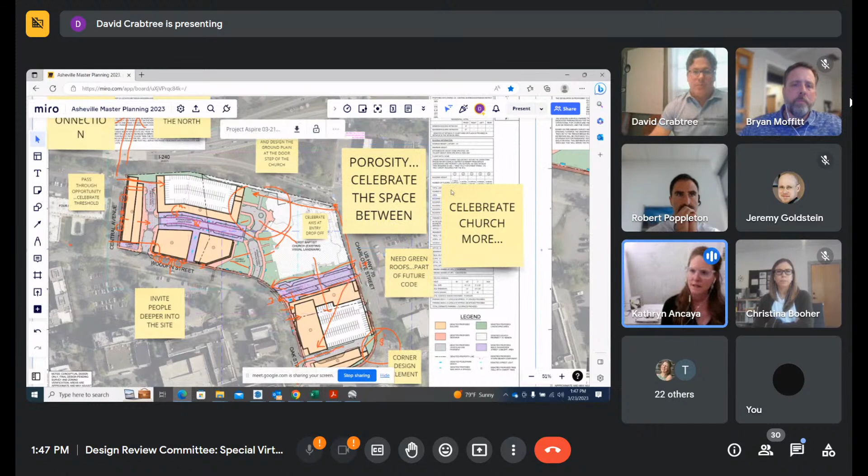Kate? Yeah, I like the porosity, the language you're using, and I like that the buildings are broken up. And I want to talk about all those spaces in between, because I think those are the spaces that people are going to use the most, right? Even though they're small or narrow, there are the spaces that have such the potential to be such a strong part of this property. But I would also point out that those special narrow urban streets that we all love don't just happen by accident. They can. So you probably, sounds like you already thought about this. Asheville, we have really cold winters and wind tunnels, and just thinking about what the buildings will create, and then how do we still create something that pulls people through and don't end up being empty or dark throughout the year, because even though it is cold and we do have rough winters, people are out all year round here and using these outdoor spaces.

So I think it's programming, what's happening at the ground floor. I think it's lighting. I think it's materials. I think it's all of the richness packed into these really small spaces. And so what that means is, again, a real dedication to designing those spaces and not just letting them be these leftover spaces that we hope people will come and move through.

Yeah, you're spot on. It is what I call the cruise ship director mentality, in a positive way. It takes curation. We can make beautiful spaces. In fact, we can put the best materials and we can put all of the urban amenities and all of those things. But if they're not curated, it's the programming. All of y'all have seen this. You've probably seen really terrible buildings that were really well programmed and curated, that were great, amazing urban places. And then you've seen amazing buildings that weren't really well curated and they weren't as rich as an urban environment. So obviously we want both, that's our goal.

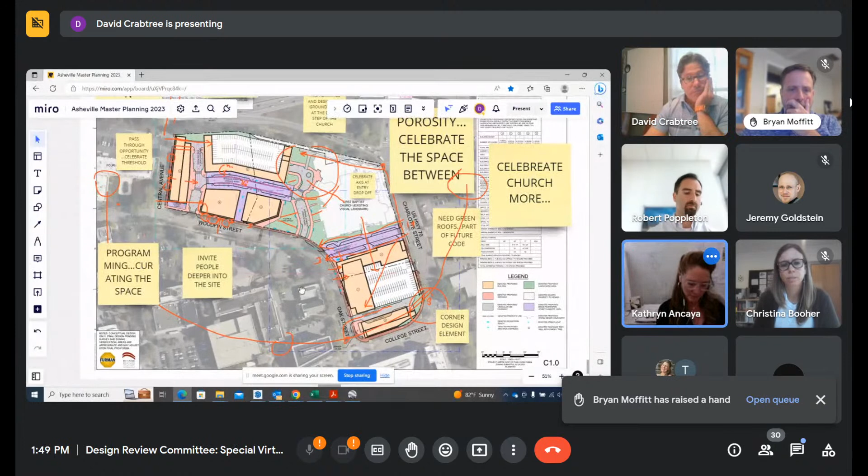And so we hear you. Yes, that's the potential. And then because I mentioned the programming, you talked about those green spaces, as you mentioned the church or the YMCA using those for programming, but just again, I know this is really early, but starting to think about how that actually happens after this, if it is this flexible open space, having a plan or buy-in early on, or something to make sure that someone is in charge of it, or that it's shared, or that there is a commitment to that, or else maybe think about a different way to use that space. But I've worked on projects where then nothing happens and they fall into disrepair. And so those are the things that are hard because they're not physical design, right? We're designing it for something we're hoping will happen. And so trying to build those partnerships and caretakers in a way along the way.

That was a lot of discussion, and the good news is both the church and the Y are very active in community planning, right? And I say community engagement planning, activity planning. And so that was a lot of discussion in our vision sessions. So our anticipation is the broader stakeholder group. And I'm not trying to assign the church and the Y only to doing this, but that's kind of been the conversation of what you're describing. How do you sort of program and bring activity to these spaces?

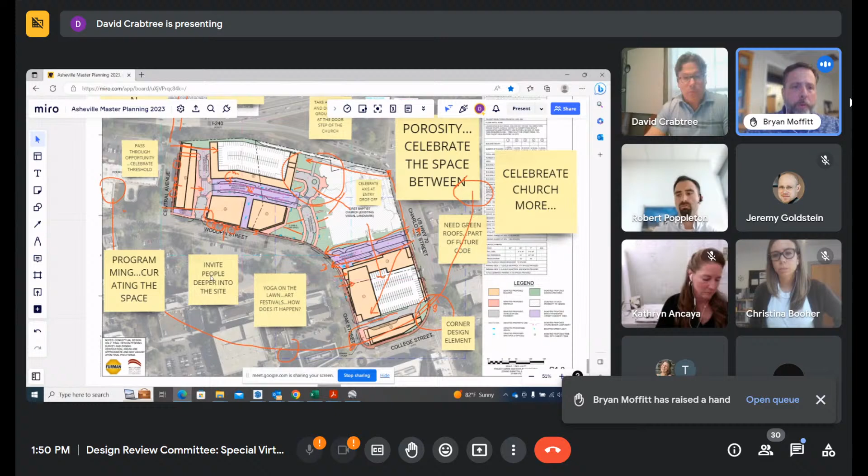Real quick, piggybacking on what Kate was talking about with building 3, I think you can connect those up above and make that space like a portal space that you can pass through. I think you can do some connections there on different levels, and I think that would be fun.

Robert, regarding your question, from both the design perspective and the downtown commission perspective, we would be super excited to see more residential coming in first. Jeremy could probably speak better to the office market here in downtown Asheville, but finding a 13,000 square foot user to fill that thing up with office space, that's a lift. Whereas residential, I think you could do that and get the project kick started. And just as a downtown user, I'm always excited to see a residential project bringing more people into downtown.

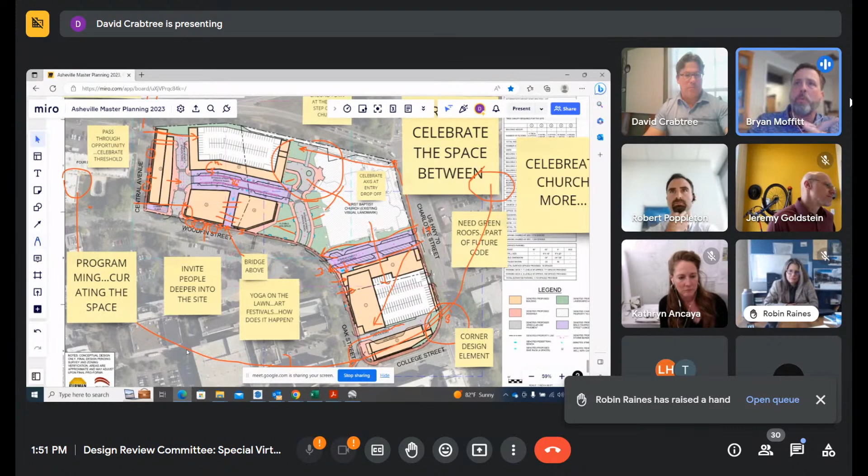So I like that. And then as a designer, watching you wrap more of the building around and over the parking, and activate that corner we were just talking about at College and Charlotte, there's a lot of positives to me in making a move similar to that. Can you go back to that, Dave, just so we can look at that balance of design on the multifamily, as Bryan was talking about?

That's our general assessment too, that housing would be well received, or at least it's needed, especially downtown. So very interested in your comments on that.

I think that would be a fantastic first building, Robin. Oh, no, I'm muted, sorry Robin. Didn't know because I turned off my camera instead of my... Anyway, that's exactly what I was going to say, Bryan.

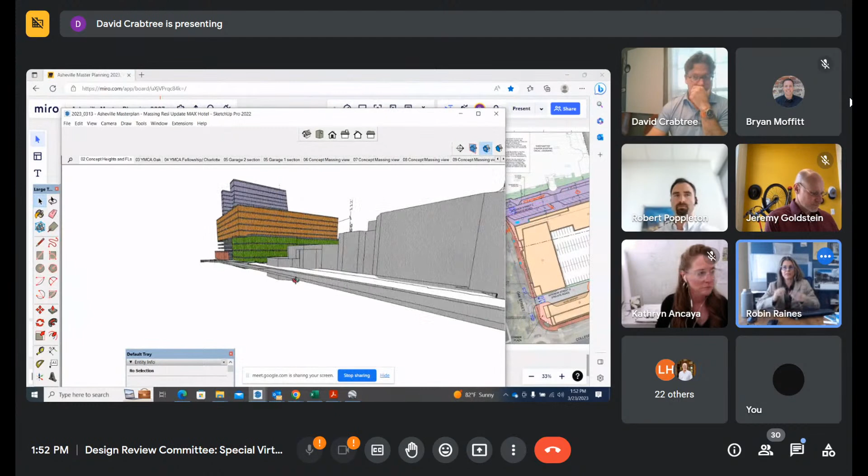I really like the addition of the residential in that phase 1. I think wrapping that corner, wrapping that garage, activating that street -- we were mentioning before how that's kind of a dead zone. Nobody walks there, but one way to make sure people walk there is live there. So that would be a great addition to phase 1. And I would personally like to see more housing in this project than was originally shown too. So I think that's a great move.

Yeah, I think we had like 600 units overall. Robert, is that kind of-- Yeah, that was what we set as the maximum delivery of residential, and we may be increasing that when we revise and resubmit.

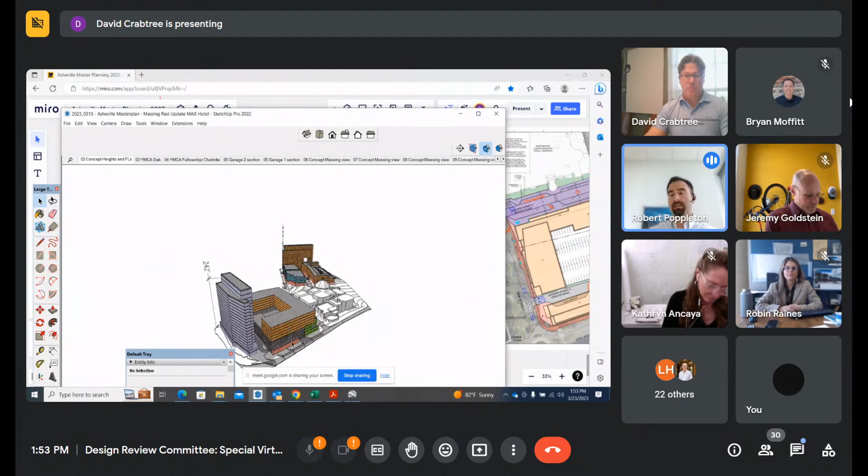Should we continue to head in this direction? I also like the height addition there with this scheme. I feel like it gives it less of a jump from super tall to lower. I like this direction way better than what you showed -- it had similar heights here, but to your point, you can kind of see.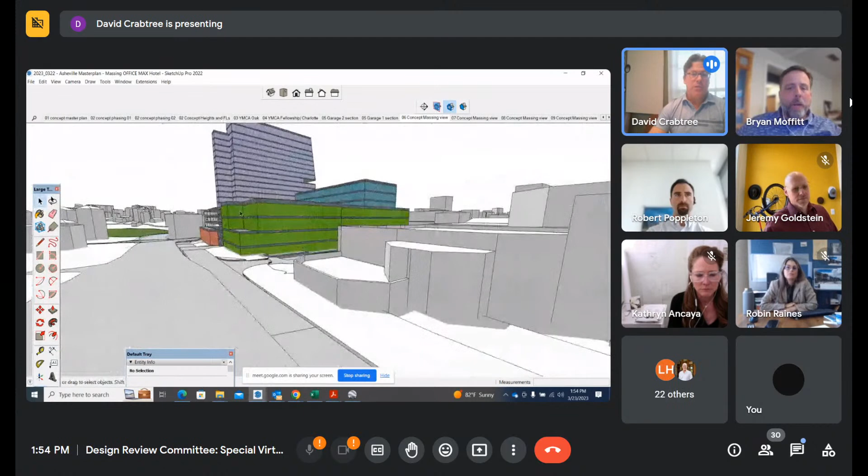I plug back to the green roof -- we actually did imagine this being green roof, though we hadn't gone through and thought about all of them being green roof, so that's interesting to consider. Real quick, I don't think anybody's going to require you to do all green roofs. We're going to say we want you to incorporate some green roofs in the project. Gotcha, yeah, that's too heavy a lift. Right, and that's something we can keep that conversation going.

But yeah, you can kind of get a sense of where you see -- let's see here, we can do a little camera 1, camera 2.

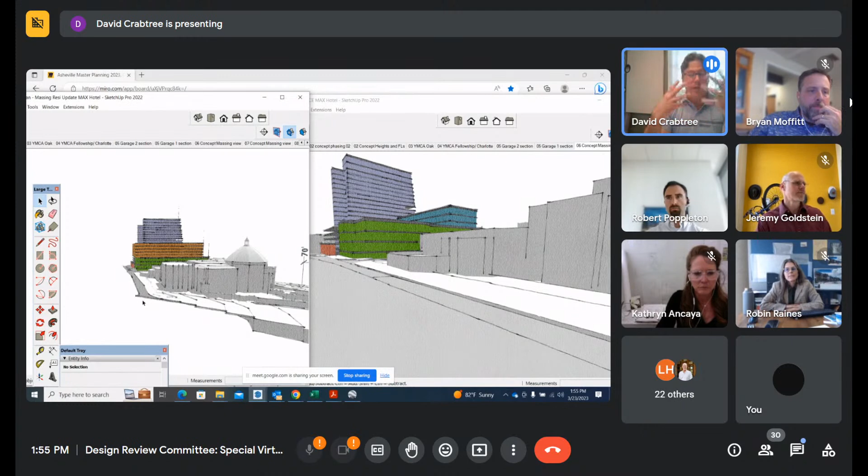So I like your height on Charlotte Street, I think that really helps. You're right, because that experience of coming in along, it's almost jarring a little bit because you're coming off the highway -- hopefully doing 60 miles an hour and not speeding like the one time I got a ticket not too long ago. But it does immediately slow you down, and then things like this would help visually slow you down from a greater distance, because you start to see cues of building, sort of visual distractions in a good way. Both have some of those qualities, but to your point, you get a little bit more of that. It is such a wide street section, that's the kind of vibe.

I can turn on context in this guy here. Hold on a second, so that they're both a little bit equal. And we do have the kind of the city mapped in here, to the best of our abilities.

I think it is helpful to see the relationship of height between some of the taller masses in downtown already.

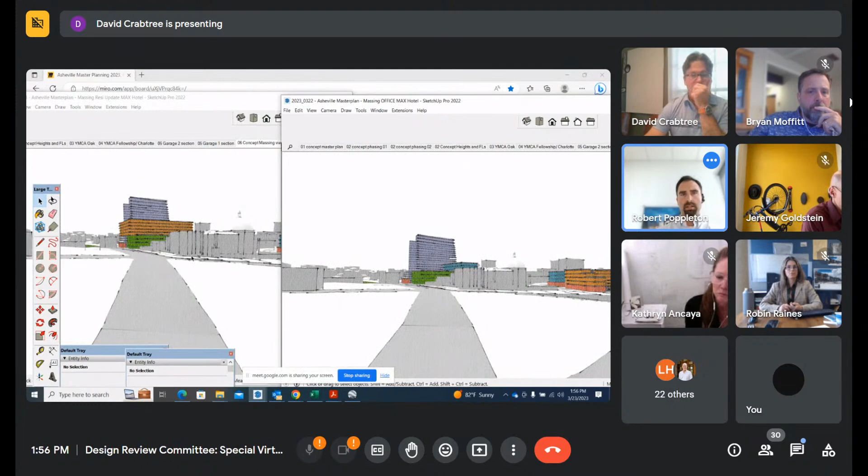What else? I want to be respectful of everyone's time, but also this has been really productive for us already. So I don't know if anyone has wanted to share something but hasn't been able to, but just eager to get your feedback in the last few minutes we have. Well, I'll say that you talked about office floor plates.

I think one of the best things about Asheville is we don't have too many national companies here. So I would not be disappointed if your office floor plates ended up small enough that it only attracted smaller firms.

Yeah, and that is the idea. That's what we feel comfortable with. We understand Asheville. I was part of the New Belgium project years ago as part of a different firm, and have spent a lot of time in Asheville and in Black Mountain, where I have a little place. So we're definitely in tune with that.

Just wanted to point out, when you see these buildings they do look big, but when you put them in the scale of things, a typical office floor plate is around 30 to 36,000 square feet. We're not trying to be typical. At 18,000, we're about half of where a more traditional office floor plate would be. And to your point, the goal is to attract the boutique, sort of granular tenant—not giant, oversized companies.

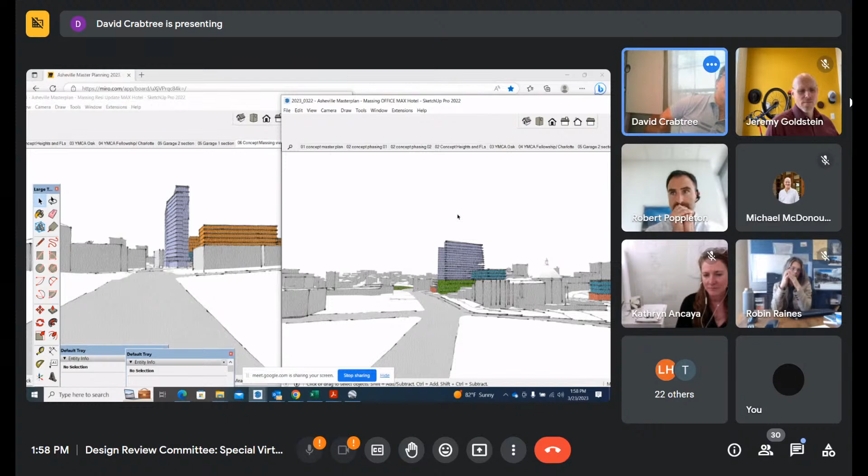I'm just going to throw in, as an Ashevillean from a different generation, that I respectfully disagree. I think we need jobs. So yeah, I think there's a balance of both, but I appreciate the perspective that you guys are bringing to the project.

Jeremy? I'm a little older than Christina, but I would agree with her as well. I don't think making room for some larger companies that could provide a more stable employment base in any way, shape, or form keeps out the smaller businesses.

Right. We're looking for them—that is still our intention. We enjoy knowing that we'll still have great opportunity in phase 2 if it doesn't materialize the same way for office use in phase 1. So we think it can be part of a good economic development delivery solution to have that type of Class A offering in downtown.

Dave just grew our building. What? Yeah.

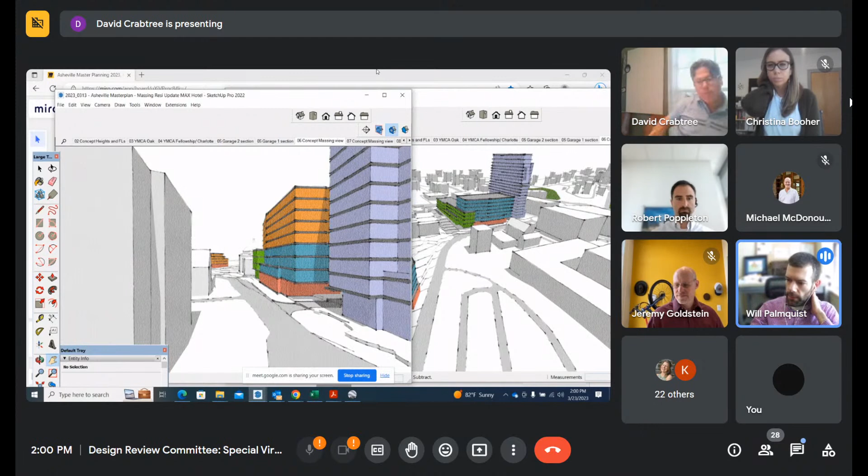Are there any other questions from the committee? I saw one from Michael earlier asking, to paraphrase, about any way to commemorate the original location, the site of the Thomas Wolfe House. It's an interesting idea—let me make a note of that.

Hold on, I've turned this one into our vision board here. Some of these things might come at later phases.

This is a very high-level review, setting the building envelopes for the development, so that when it comes back for the final round we'll know the box within which these buildings can be built, and then working through any technical modifications needed in the design through the conditional zoning process—so if there are parts of the CBD code or other parts of the UDO the project can't meet, we know those ahead of time and adjust accordingly. That's the purview of where we'll be in the next few months reviewing this project.

Are there any questions or comments from committee members?

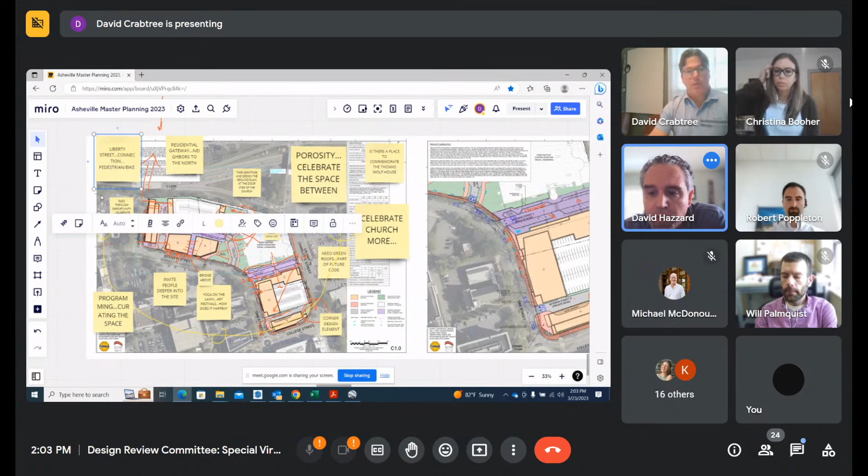This is a question that was kind of brought up already, but Liberty Street is a key pedestrian and bike corridor to most of our residential neighborhoods to the north. So I was curious how you're treating that streetscape, and what kind of sidewalk widths there are. I guess just a general comment on sidewalk widths: 10 feet is our minimum width, but especially for a project of this scale, it would be nice to have wider sidewalks on the public streets, definitely when they're up against some of the larger buildings, to avoid a narrow sidewalk like that. It would be important to make those sidewalks larger.

One of our questions is part of it is the build-to line. These buildings are supposed to be built to the property line, and this is built to the property line, which leaves us with a 10-foot sidewalk. If we can move it back a couple feet and not be at a build-to line, it gets into one of our technical modifications. So 12 feet would be nice when you think of a 5-foot tree grate and then a 12-foot section, that leaves 7 feet left over. You could have a 2-foot Parisian strip and then a 5-foot clear walk, or some variations. We are keeping it broader where possible, and balancing that out.

One of the questions we had, and I'll put it back to you, is that some of the standards call for a 26-foot drive for interior drives for fire access. Is anyone aware of the flexibility we might be given there? Because if we could have a more narrow street section here, we don't need 26 feet for cars, we don't want 26 feet for cars in here. We're giving it because we think it's a technical requirement, but we were really looking at could you go down to like an 11-foot drive and a 22-foot section? Because again, this isn't about cars, it's about people, we're just giving the option for cars to be there.

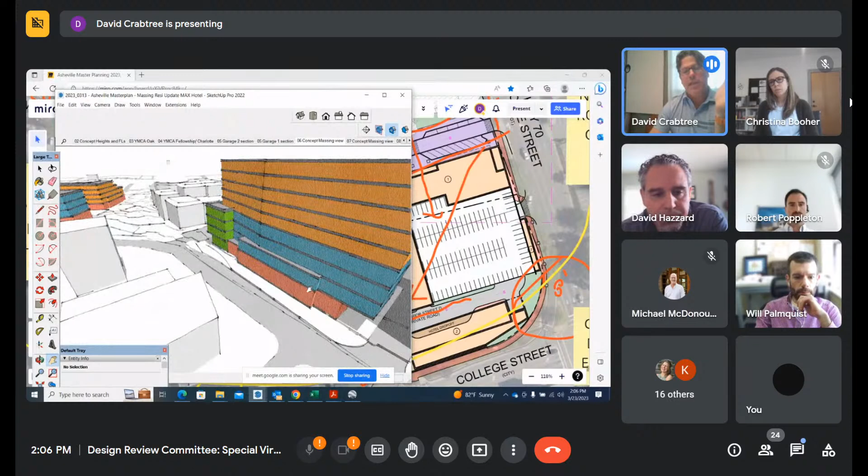And definitely having a wider sidewalk, some more relief along that right of way for that really tall building, would be beneficial. For example, one of our requests was a technical modification where this is like 1/3 meeting it, where it was 2/3 of your street meeting it versus this being like 1/3, and then allowing setbacks. So we specifically did that so we'd have more room here and more room here, for example, but this meets more of the minimum for those. So that's a really good question.

This one, we were more intentful of putting it directly to the build-to line, because these street sections along Woodfin and Oak are broader than 70 foot, so we had more flexibility, where this one doesn't have that same flexibility. So we were trying to show what happens if you put that, based on the way we might have been misreading the code, putting it to the build-to line and then giving more relief at the corners where we thought that would be a fair ask.

But you could start to imagine, based on our technical modification requests, only a third of this kind of meeting, and then allowing it to kind of relief more or whatever—that was the intent anyway of that request.

Yeah, and I think what I've heard from committee members, maybe at this meeting and then from staff generally too, is thinking about how that tall building can work in a way that doesn't overshadow Charlotte Street.

There's like a mixed-use hotel project planned across the street that, I don't know if your design incorporates that new building. Looks like it. Yeah, right, so it's about as long, if you will. It's the same kind of. So then it kind of steps down to Central, where your project would be more of a statement.

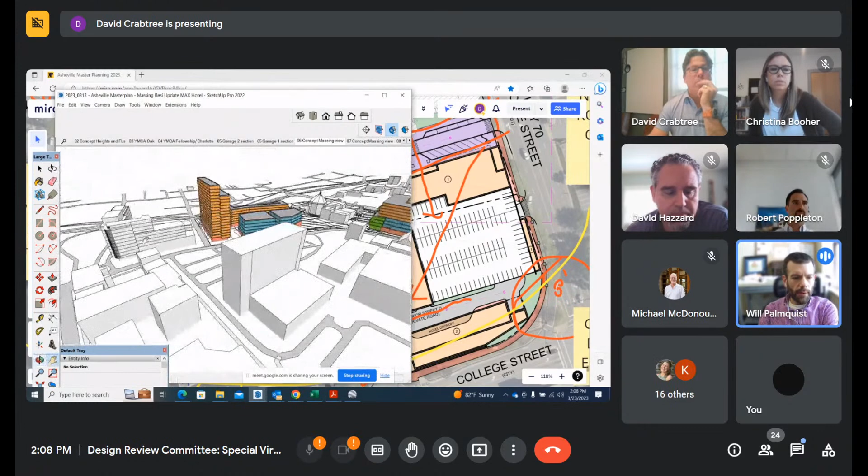So anyway, trying to think of ways—design features, materials, fenestration—to minimize those kinds of visual impacts, so it doesn't feel like a canyon in any way along Central, would go a long way.

Yeah, I do think that at this, particularly at the residential building here. What were you gonna say, Christina?

I was just going to jump in quickly and say what it feels right now to me when you look at the massing and the street is a lot like what you see with the Staples building on Merrimon. And I think anyone from Asheville who's experienced that knows—I think it met all the requirements, but it's a terrible experience for that street.

And this is a much smaller, more local street, so it would be great to see that activated. Okay.

Yeah, I think I would point out, kind of while it's not the same, our massings are being somewhat generic. Well, this would be the only place we've spent some time giving you a little bit more illustrative, just to give you a sense of what happens when you start to break down the scale, doing what we're imagining. This is not a final design.

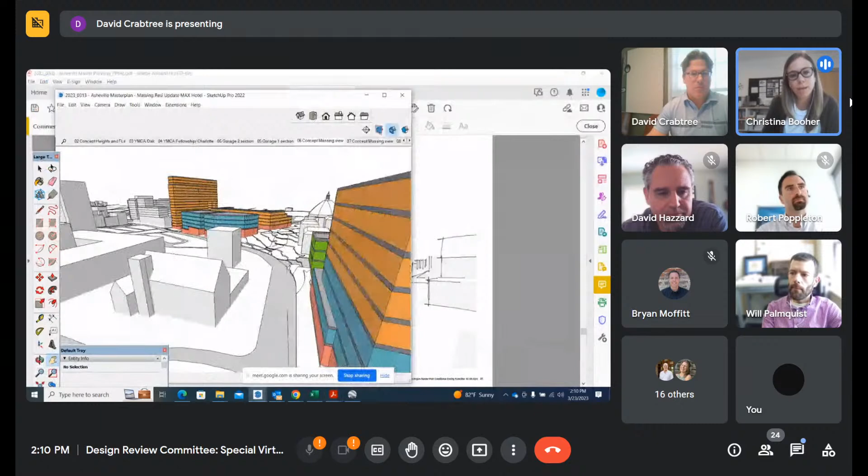I do just want to say that what you're showing there at the Y building now, I think is going in the right direction. I mean, you're showing the activation of the street. So don't mean to only have negative comments, but I think what you're saying, and the fact that as it develops it starts to get that street activation—I hope to see that on Central Avenue. So it's exciting to see that you're going in that direction on the buildings that are further developed.

Yeah, we agree. And it's like the fine line of how much massing articulation do we show at this scale, knowing that these individual architects will be coming in as well. So this isn't going to be one architect doing all these buildings. So we're in that sort of gray zone of trying to show height, bulk, and area, not making it a completely dumb box, but also not making it completely over-articulated that may not ever happen. But we do believe in what you're talking about.